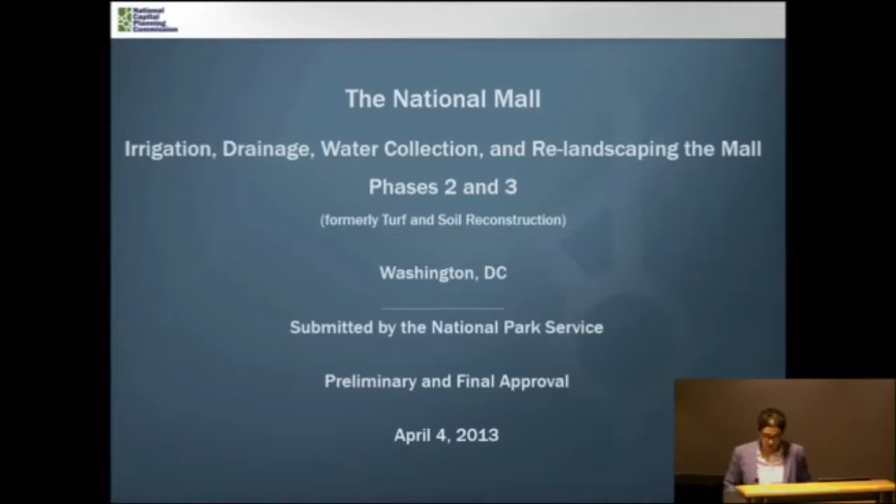This project addresses the center lawn panels located between the U.S. Capitol and the Washington Monument, and is based on recommendations in the National Mall Plan, which was adopted by the Park Service and this Commission in 2010.

The mall plan included a comprehensive vision to rehabilitate the mall in order to sustain high levels of use, accommodate permitted activities, protect park resources, and provide visitor services and amenities. One of the recommendations included improving the condition of the turf and soil on the mall, but also widening the walkways to accommodate the number of public events and national celebrations that take place every year.

The project was divided into multiple phases. Phase 1 was approved by this commission in February 2011 and addressed the 3 easternmost lawn panels located between 3rd and 7th Street. Construction on this portion was recently completed prior to the inauguration celebration this past January. Phases 2 and 3 address the remaining lawn panels located between 7th and 14th Street.

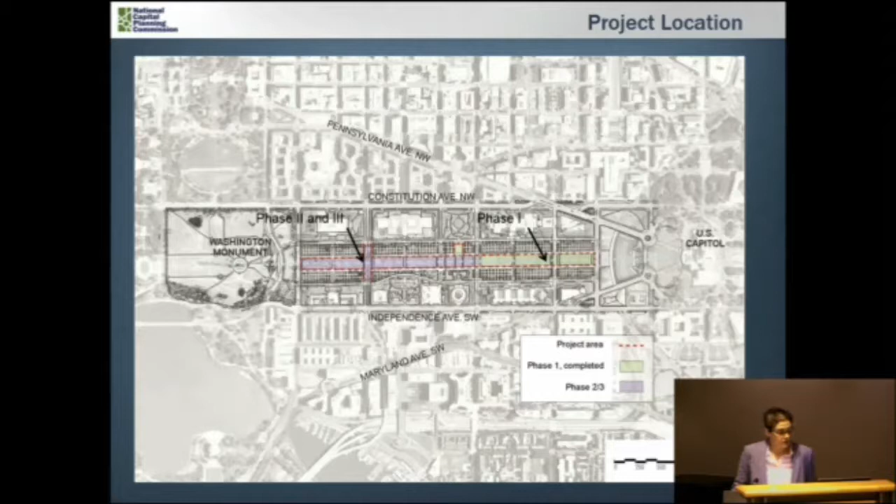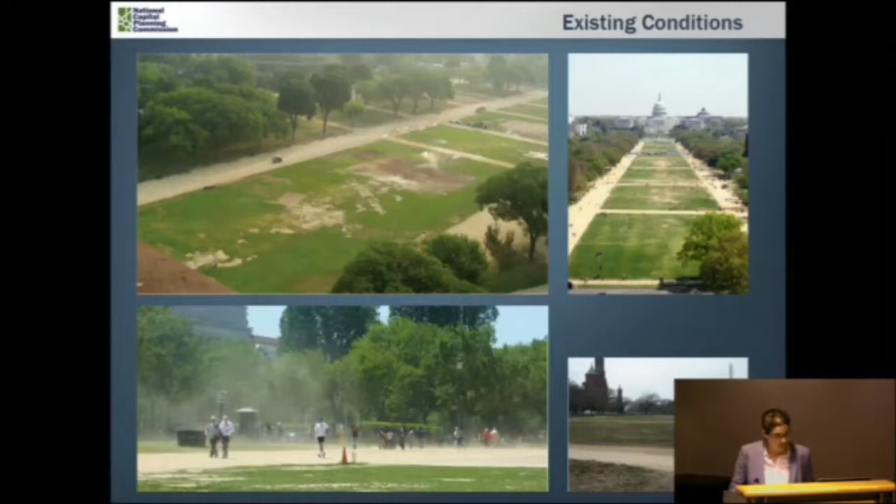Some of these events require tents, equipment, fencing, and different types of stages, and all of this can have a negative impact on the condition of the turf, causing soil compaction and poor drainage over the years. In addition, the turf is worn away in several places, and the dust can cause major disruptions at times.

To address these conditions, as part of Phase 1, the Park Service developed solutions to improve the overall health and condition of the turf. Many of these improvements will be implemented as part of Phases 2 and 3, and I'll briefly review what those are.

A granite curb will be installed around the lawn panels to provide structural support and containment for the soil. A gutter system will be integrated into the curb so that water will be directed into an underground water management system. The panels at the corners will be modified with a 15-foot radius.

The top 18 inches or so of the soil will be removed and re-engineered with a more compaction-resistant variety. The panels will also be regraded with a slight crown at the center to facilitate drainage. Finally, 2 additional cisterns will be installed below grade, along with a drip irrigation system.

2 cisterns were already installed as part of Phase 1, and so with Phases 2 and 3, the total water storage capacity will be 1 million gallons.

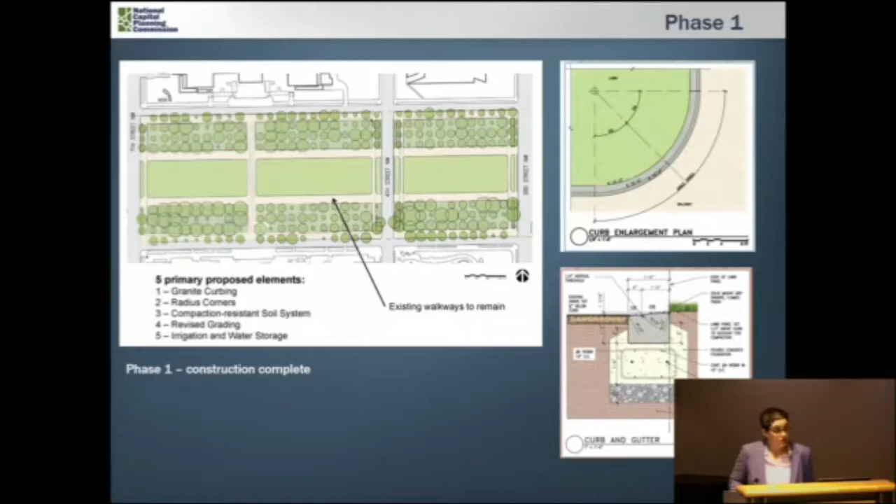These images show the end result of Phase 1. You can see the dramatic improvement in the condition of the turf when compared to panels that have not yet been done, just to the east of 3rd Street.

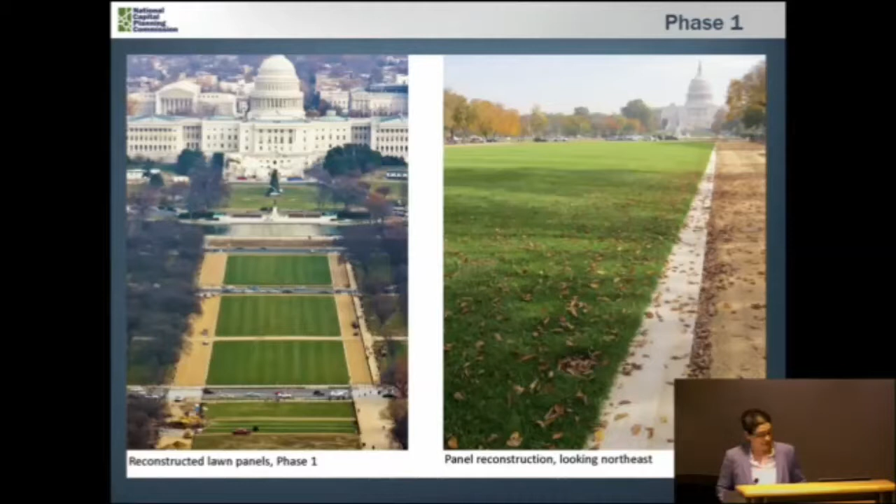Along with the physical improvements, NPS has also issued an operations and maintenance manual that provides new processes and permit requirements for events in order to protect the turf. This manual specifies how long the turf can be covered, as well as a schedule for turf preparation and recovery time between different events. The Secretary of Interior has also signed an order to enforce the mall turf manual, further the goals of the mall plan, and guide NPS as it continues to rehabilitate the mall.

In combination, the secretarial order with the mall turf manual are tools that NPS will use to improve the management of events on the mall. They both provide for special events and activities to continue, but they will also protect the landscape as a historic and natural resource.

The recent inauguration was a test for the Phase 1 improvements, both the physical improvements as well as the operational and management changes that the Park Service is proposing. As required by the new manual prior to inauguration, as you see here, protective coverings were placed over all of the lawn panels.

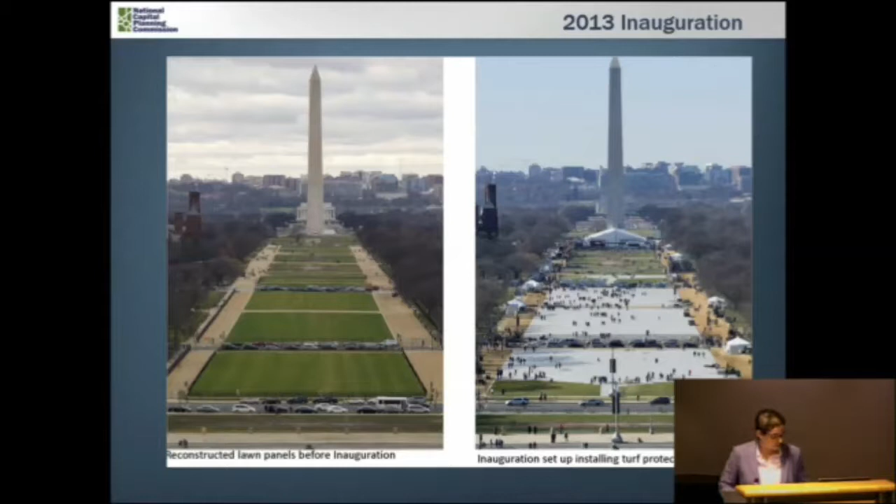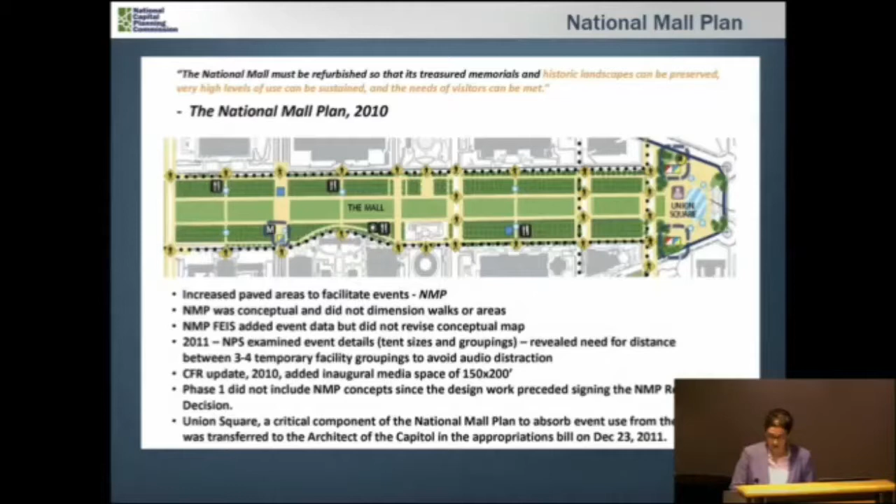As I mentioned, while Phase 1 was under construction, the National Mall Plan was adopted, and therefore the remaining phases of the project, Phases 2 and 3, will introduce recommendations from that plan regarding increasing the paved area on the mall to accommodate public events.

In March of 2012, this commission provided comments on the 3 schemes that NPS was proposing for widening the walkways. In some locations, NPS was proposing at that time to widen the walkways to as much as 146 feet. While the Commission supported the Park Service's efforts to rehabilitate the mall and accommodate large events, the Commission asked for additional information in order to evaluate the extent to which the walkways needed to be widened.

Since receiving the Commission's comments, NPS has held several interagency meetings with NCPC staff, the Commission of Fine Arts, as well as the District of Columbia State Historic Preservation Office. The results of these meetings basically indicated that the general consensus was to minimize widening the walkways in order to maximize the continuous green of the mall, which is an important character-defining feature, and to preserve views towards the Capitol and the Washington Monument.

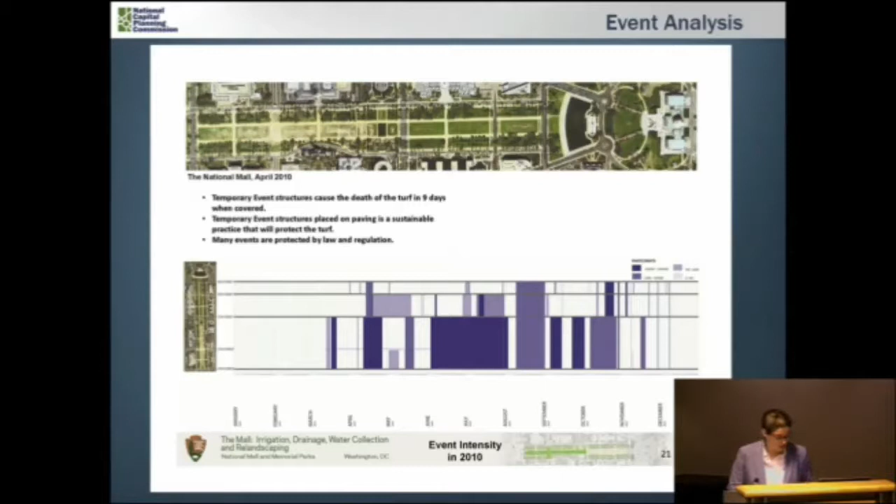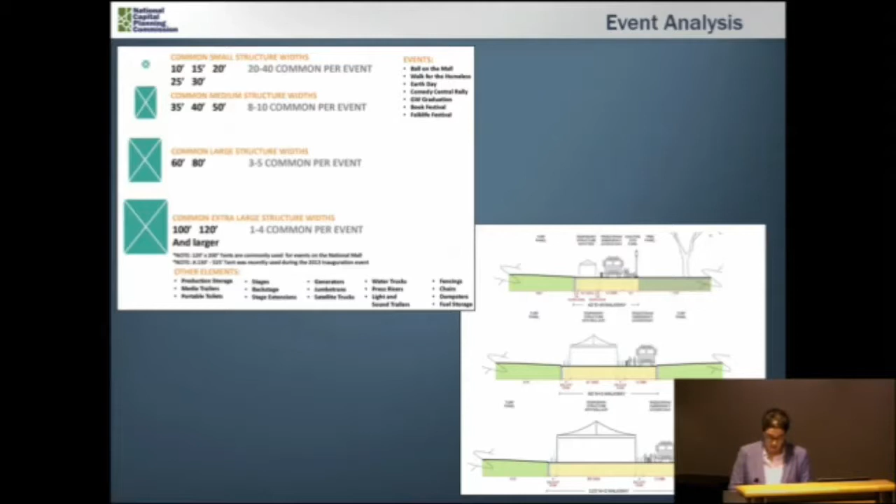In determining the appropriate width for the walkways, NPS looked to historical plans, as well as the data on the typical size of tents and equipment that are usually placed on the mall to arrive at their proposed scheme. In order to accommodate some of the largest events and the tents, and also accommodate circulation for pedestrians and emergency vehicles, NPS determined that 105 feet was the minimum size required, as you can see in the sections on the lower right.

The proposed design basically calls to widen the walkways along the 9th and 12th Street corridors to 105 feet, in this location and this location here. The other walkways will be taken from 40 feet to 60 feet.

Two non-turf areas will also be created to the north and south of the center lawn panels, just directly adjacent to the metro station in this area, and then directly to the north of the center lawn panels in this location. This will be 146 feet. And then the smaller lawn panels that are located to the west of 7th Street will be combined into one larger lawn panel.

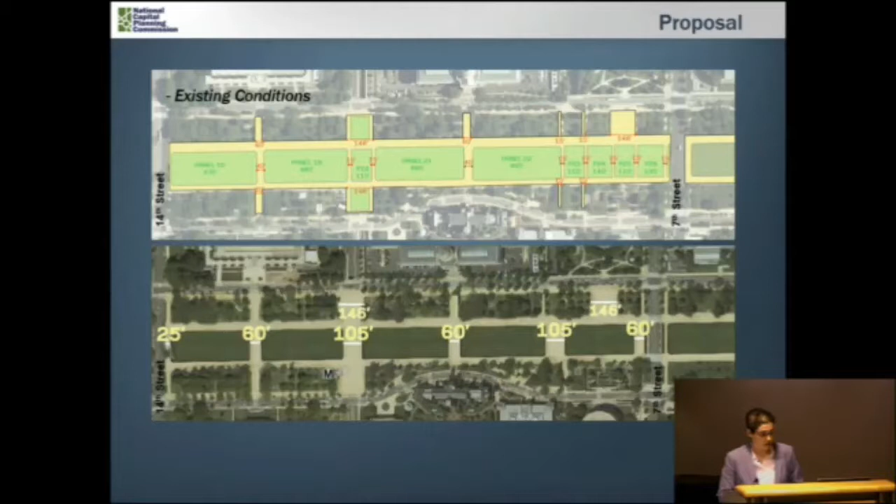As in the Olmsted Junior Plan in the 1930s, this design establishes lawn panels of approximately equal size and a regular pattern of 60-foot wide walkways, with 2 wider areas to accommodate larger tents and structures. It does require some changes to the management of events, but the majority of events will be accommodated without impacting the turf.

CFA has recently approved the plans for this project, and noted in its comments how the proposal balances protection of the historic landscape with accommodation of public events.

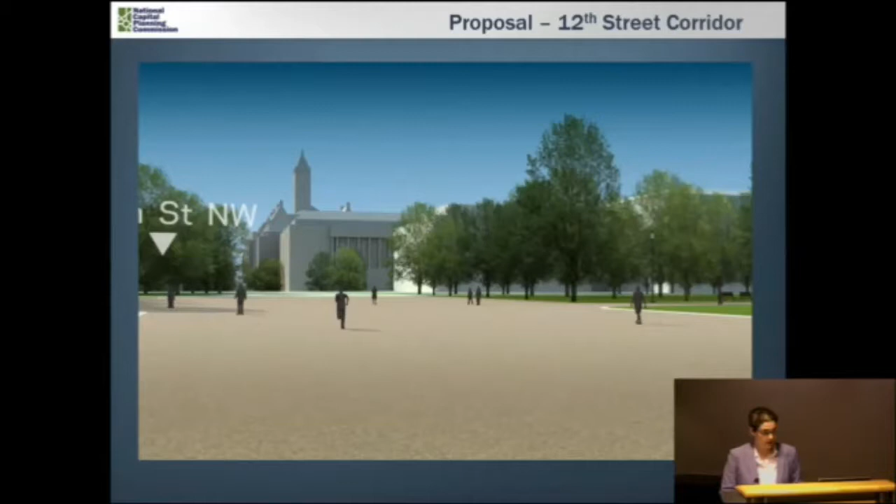Here you can see some renderings. This is the proposal along the 12th Street corridor where the walkway will be widened to 105 feet. And here, just past the 9th Street corridor, it will also be widened to 105 feet. This gives a good idea of how the views and the continuous green along the mall will be maintained, and how the regrading of the panels accentuates the green along the mall.

With that, it's the Executive Director's recommendation to approve the preliminary and final site development plans for phases 2 and 3 of the turf and soil reconstruction on the mall, noting that the project takes into account recommendations from the National Mall Plan to widen the non-turf areas in order to improve accommodations for large public events and national celebrations. That concludes my presentation.

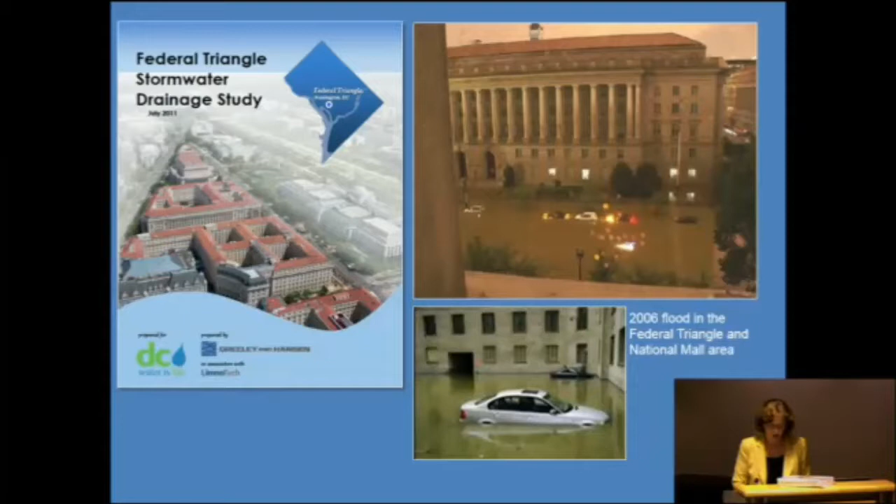This effort is being led by Albert H. Small, a local developer and philanthropist, planner and architect Arthur Cotton Moore, and the National Coalition to Save Our Mall. Since summer 2012, we have been briefing federal and DC officials and agencies, congressional staff, and the public on this concept. We have found much enthusiasm. Last Sunday, the Washington Post published an editorial supporting the idea, a copy of which we've included with our testimony.

The idea is this: construct under the mall a hybrid parking garage that does double duty as a stormwater reservoir. Include in the parking separate spaces for cars and tour buses. Also include a separate bottom-level cistern to collect rainwater and groundwater from nearby buildings. This facility would contribute to creating a sustainable and resilient mall for the future.

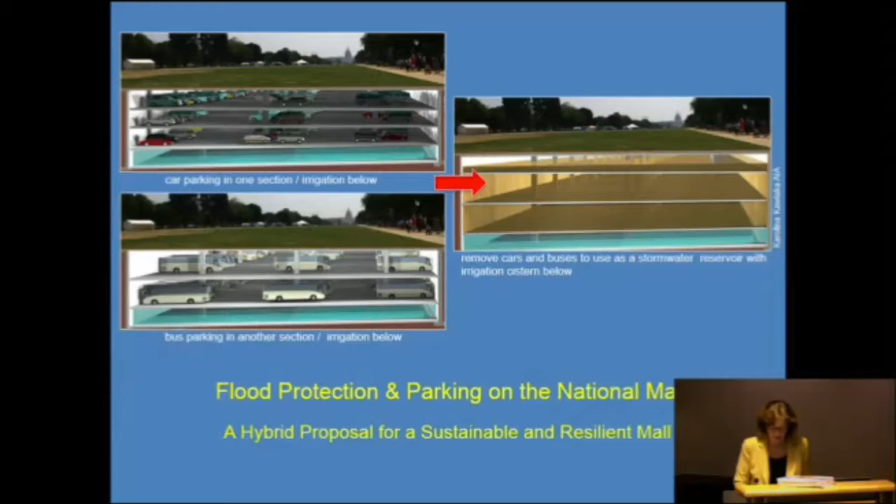The location for the facility, proposed in a study conducted by Dewberry Engineering, is between 9th and 12th Street. Entrances and exits for the parking facility could be placed in the 9th and 12th Street tunnels to minimize intrusions on the sensitive mall landscape.

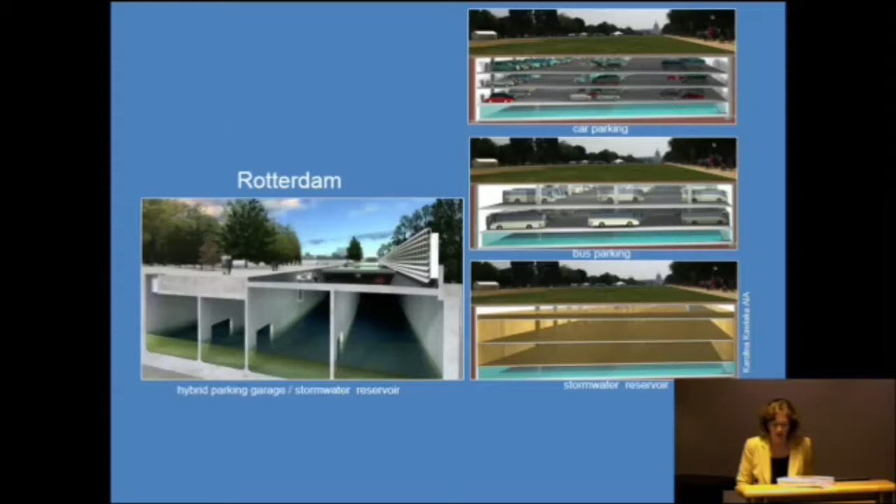Underground garages in cities around the world and the United States provide visitor access while creating car-free city streets. Here in Washington, the National Cathedral Bus and Car Garage is a successful example. One model of a hybrid facility that is both parking garage and flood reservoir is this example in Rotterdam.

Our proposed hybrid facility solves 3 major needs: a reservoir able to store 34 million gallons of stormwater, cisterns to supply a reliable source of water for irrigation of the grass as well as all mall area gardens, trees, fountains, and more. The Park Service cisterns, in contrast, will provide only 30% of the water needed for the grass alone, and no flood protection.

And parking for more than 1,000 tour buses and cars. An additional benefit is completion of the Park Service's turf grass as the green roof of the facility. Revenue from the self-funding parking component will help offset the capital costs of construction.

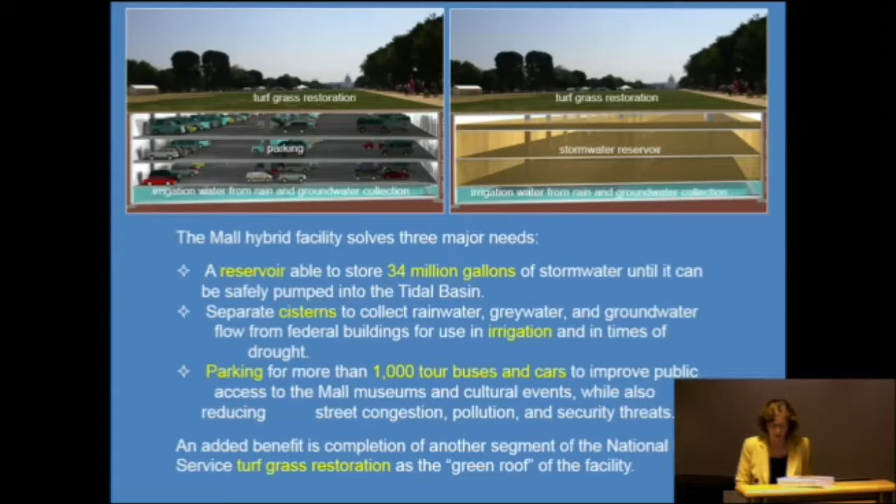We are looking at public-private partnerships as a model to develop, fund, and complete this proposal. Additional benefits could include restrooms, a mall visitor center, showers and restroom facilities for bus drivers, integration with Metro and Capital Bike Share, a security office, and an educational demonstration of this innovative water treatment facility. These features are among the amenities suggested during our meetings with the Smithsonian, the Museum, Destination DC, and others.

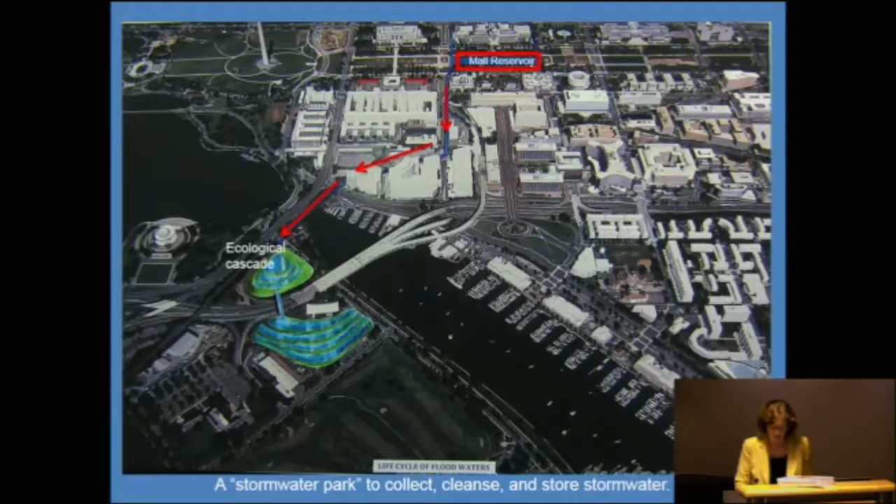You are looking at draft number 30 of our proposal. Each meeting has helped this proposal evolve. Dirt from the mall excavation can be used to create an earthwork stormwater park or ecological cascade on East Potomac Park to collect, cleanse, and store stormwater until it can be released into the Potomac.

Everyone benefits. Visitors will find easier access to the mall's museums and cultural events, much needed as shown in the Fox 5 WTTG television news story last Sunday. Federal and district agencies can get tour buses off neighborhood streets where they cause congestion and pollution.

There will be no more need for ugly piecemeal flood measures, such as these sandbags lining Metro vents outside EPA headquarters. The federal and district agencies will get the much-needed flood protection facility as part of the larger project, developed and funded by a public-private partnership.

Our proposal still has a way to go, including cost-benefit analysis, traffic studies, and engineering studies, but it is not a pipe dream. With this hybrid facility, the mall will be a model of sustainability and resiliency in the heart of the capital and the nation.

This is, in our view, the kind of long-range, comprehensive, visionary proposal we need on the mall to sustain the symbolic landscape's crucial role in our nation's civic life in the 21st century. We believe as well that private sector initiatives such as this will become an important tool for planning and infrastructure upgrades for Washington and the mall in the future.

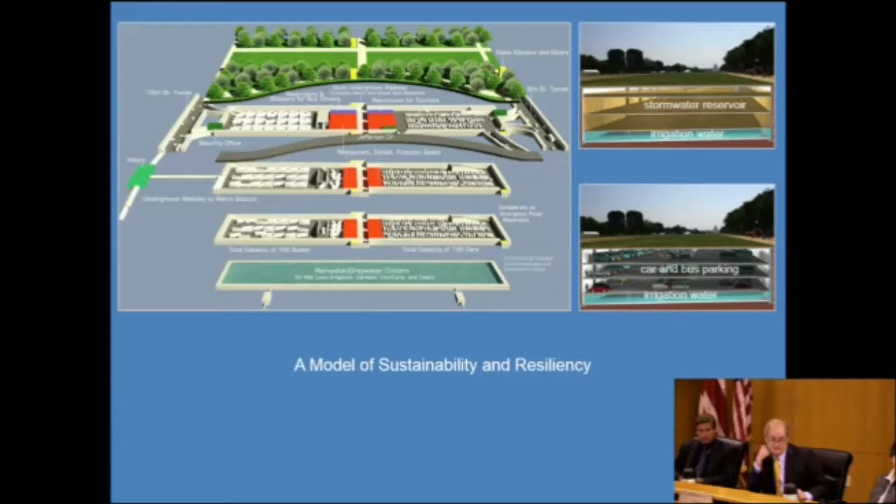Any questions? Mr. Goni? Dr. Feldman, you mentioned that a public-private partnership and the potential for parking revenue to finance this project. Are you saying that's possible in whole or in part?

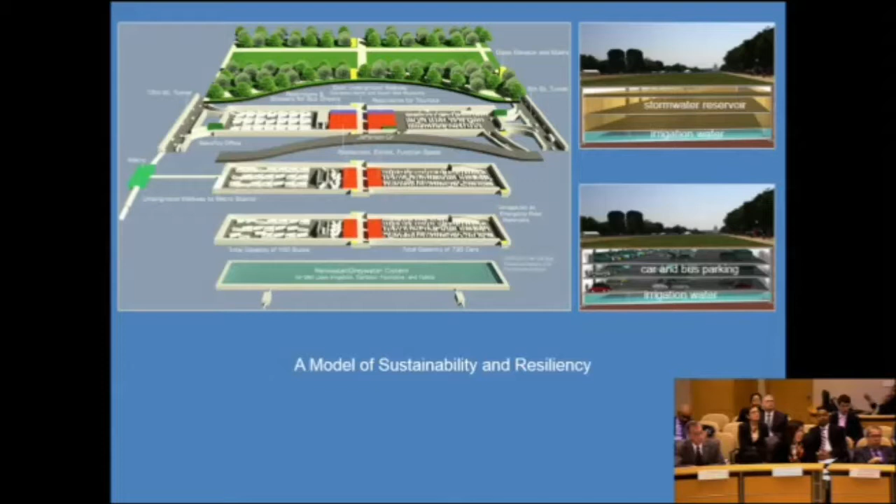It's probably in part the parking revenue. We're actually in the process of talking with a variety of agencies and organizations about the public-private partnership idea. Mr. Small was working with Patton Boggs, who also had some experts looking at it, but really the questions are, we don't know the answer to that. It's been suggested, though, that the parking, and in particular the bus parking, could provide a considerable amount of income.

Also, restaurants or other revenue-producing elements could add to that. But frankly, we don't know. We don't know the cost, because the cost of the parking, simply a car parking garage, which Dewberry did for Mr. Small back in 2011, a two-story, 1,000 car garage was $60 million.

The cost estimate of this flood reservoir with new sewer lines on Constitution Avenue was 400 and some million. So I think we're somewhere probably in between that, but we don't know yet. But we actually had a meeting this morning, and we're having another one tomorrow to try to get, again, privately funded data to evaluate these questions, because we really don't know that it's feasible yet until we do that.

I have a question. Is the 400 million exclusive of the water treatment facility in East Potomac Park? The 400 million, and I'm not sure I read this correctly, if anyone has a better understanding of the data in this, but the 400 plus million comes from this study, which evaluated the stormwater problem, proposed simply a large reservoir under the mall.

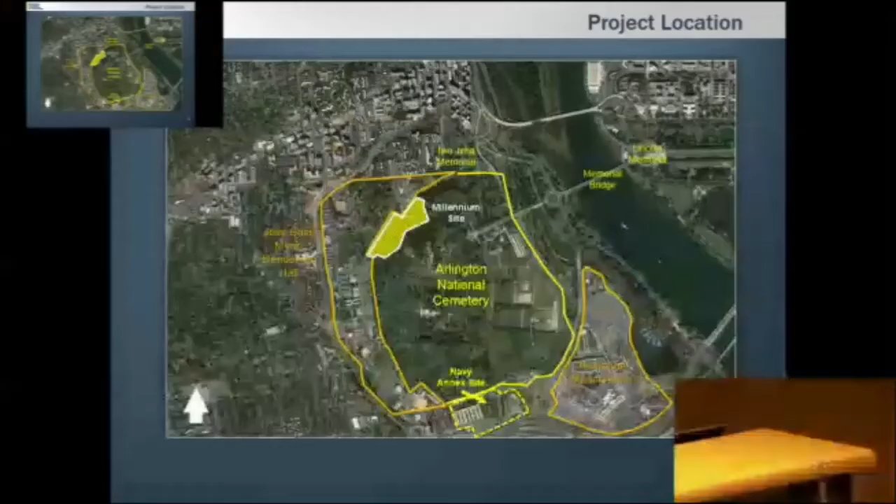In the mid to late 90s, Congress became concerned that Arlington National Cemetery would cease being an active cemetery, and passed laws to extend its life through expansion onto nearby lands - these two sites. The site before you today is just the Millennium site. The Army states that without this project, the cemetery is expected to reach capacity in 2023. The Army also states in the EA that is out for public comment that this project is expected to extend the cemetery's life by 7 to 12 years.

This parcel is made up of land transferred from both the National Park Service as well as Joint Base Myer-Henderson Hall. The yellow part of the parcel shown here was transferred from Fort Myer in 2004. For your orientation, north is to the top of the image, and the outline in white is the actual Millennium Project.

The green striped area shown here is a parcel that was transferred from the National Park Service in 2002, and it is part of the historic setting of the Arlington House, shown here. Finally, there's a purple section, which is the existing maintenance yard for the cemetery, for ANC contractors. Arlington House is listed on the National Register of Historic Places.

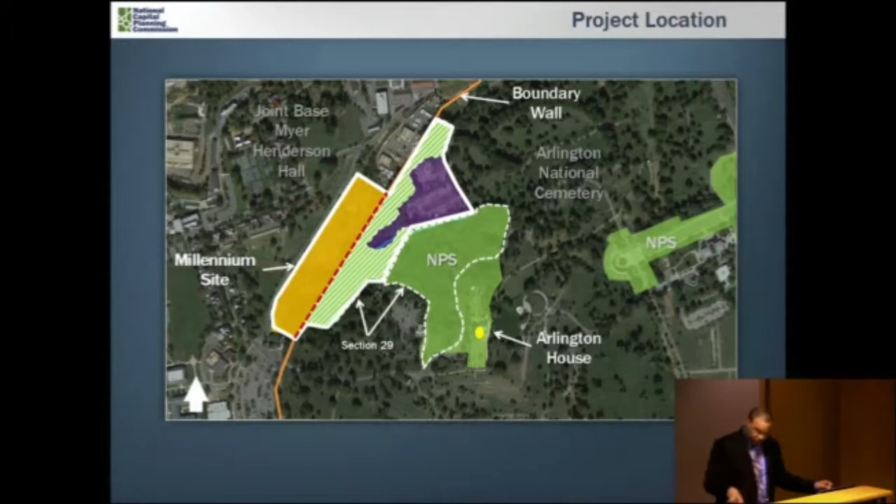I'd like to note that the Arlington House historic setting includes woods found in both the green and green striped area, which I noted earlier, and the woods closest to Arlington House are the oldest, which date back 235 years. There are other wooded areas, and those ages I'll describe in more detail in upcoming slides.

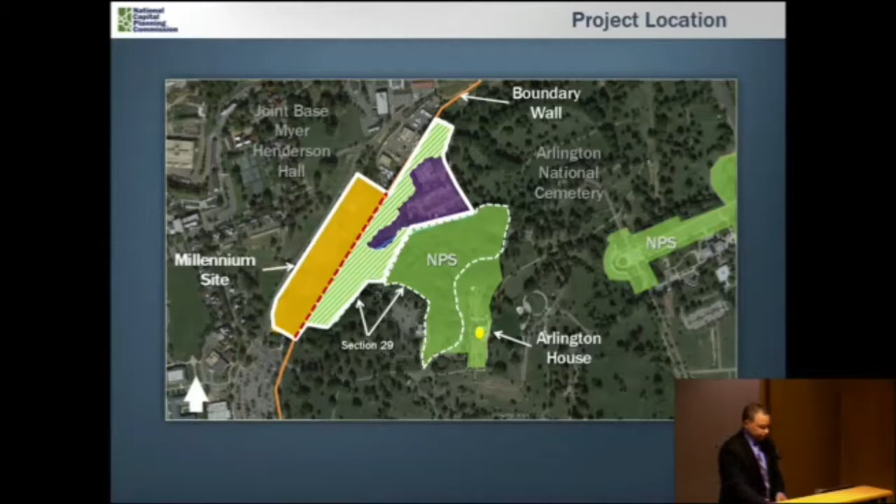So here's the site itself. The land from Joint Base Myer-Henderson Hall is generally an open area with some trees as well as grassy areas, while the land from the National Park Service is generally wooded. There are moderate to severe slopes on either side of the perennial stream which runs through the site. The existing stream bank has been eroded from previous storm events, and a restoration will be included as part of this project. You see the stream shown here in blue.

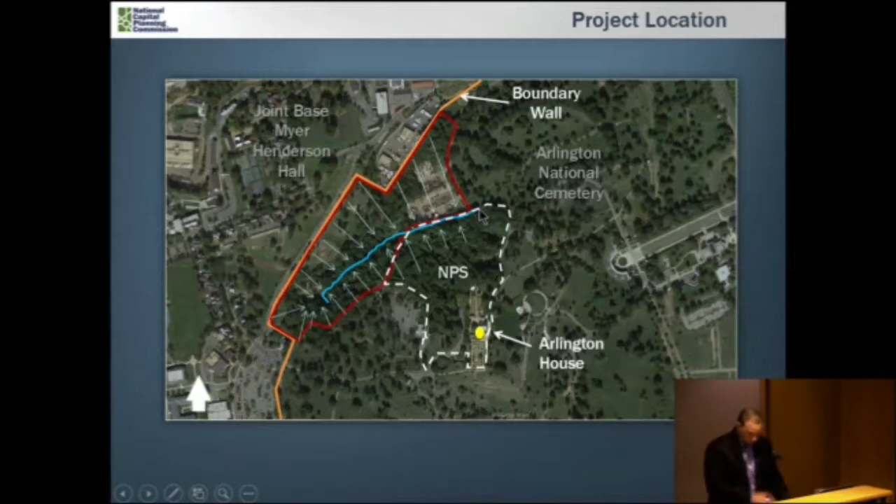So all of that is the Millennium site. You'll note a historic boundary wall, this kind of dark line that goes through the site. That used to be the dividing line between Joint Base Myer-Henderson Hall and the cemetery. A 1,300-foot portion of this wall will need to be removed as part of this project. The Army states it will reuse pieces of the wall in the construction of the perimeter wall when it's built, and I'll describe that in more detail in an upcoming slide.

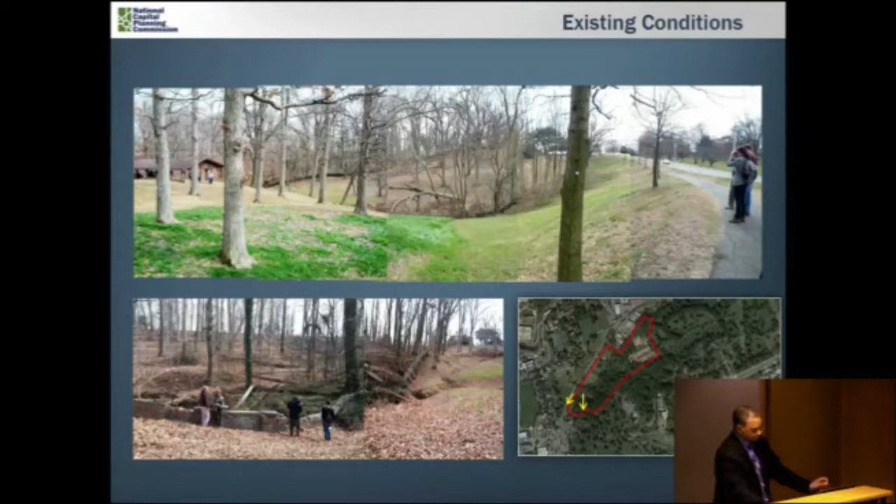Another set of condition images. The top one is from the Arlington National Cemetery maintenance area. You note on the map on the bottom right, it's looking towards the west. The other images are of the Arlington Woods. In the bottom left is the stream, the part that's been eroded. This gentleman is standing in the middle of the stream, so that's quite a bit of erosion that's taken place.

Next we'll get to the proposed site plan. The Army developed 6 alternatives as part of this project over the last few years, and has chosen this alternative, E1, as its preferred alternative. I'll describe each of the elements of the design in upcoming slides.

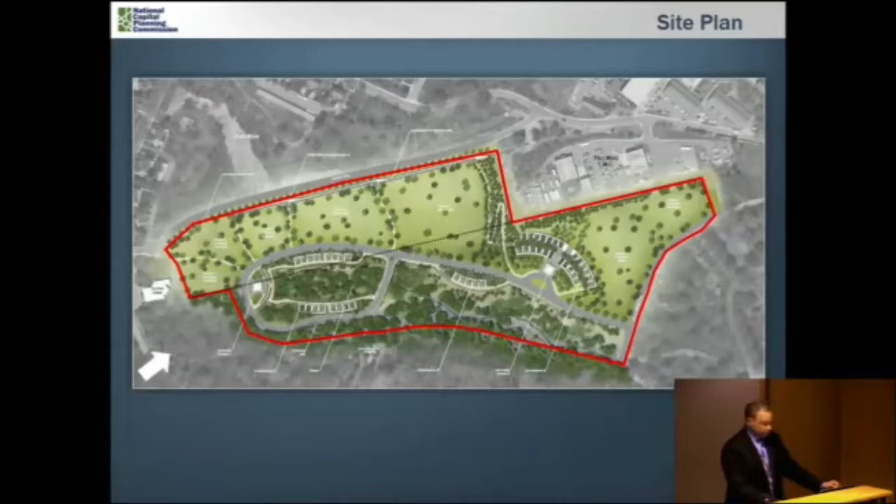The plan includes 29,922 burial sites for both interment and inurnment burials. For in-ground burials, they're shown here in the yellow-orange color. There are 3 different types: a traditional burial, a pre-placed crypt, and an area for cremated remains.

The traditional area is here. These are burials very similar to what is occurring now in the rest of Arlington National Cemetery. These pre-placed crypts are concrete structures placed side by side, and they're actually in the ground, covered with between 18 and 24 inches of soil. These allow caskets to be placed closer together, therefore increasing the number of burial spaces available.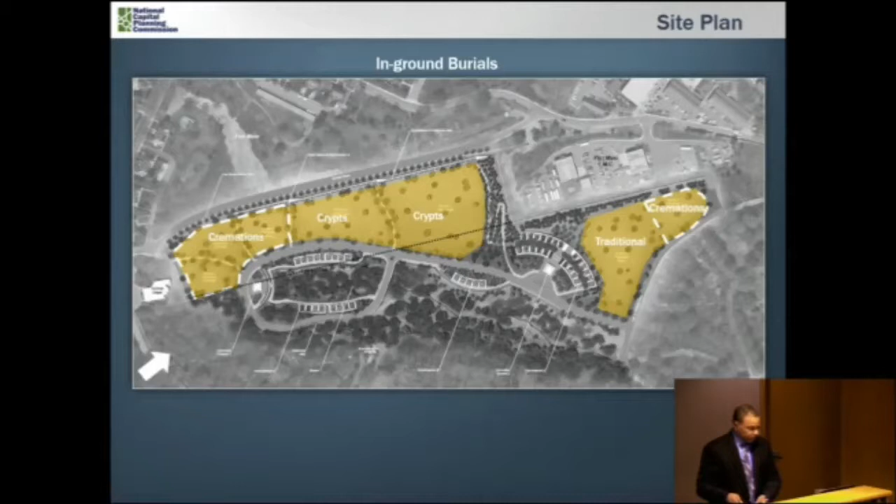The final area is for cremated remains, one area over here for in-ground burials, and another area over here, so on either end of the Millennium site. This allows the Army to give families the choice of either having in-ground burials for cremated remains or using the niches. I'll talk about the niches in the upcoming slide.

The columbaria, you see an image of an existing columbaria, one of the courts that actually currently exists on Arlington National Cemetery.

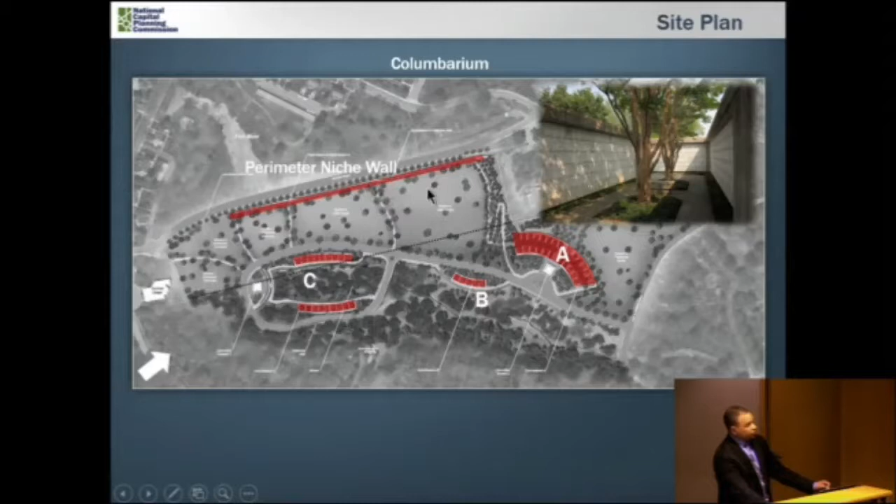They provide niches or small spaces for cremated remains, shown in this image in red. There are three court areas: Columbaria A, B, and C, going from east to west, or left to right. A and B are shown here, and C is these two areas. Then there's a perimeter niche wall shown along the border with Joint Base Meier-Henderson Hall.

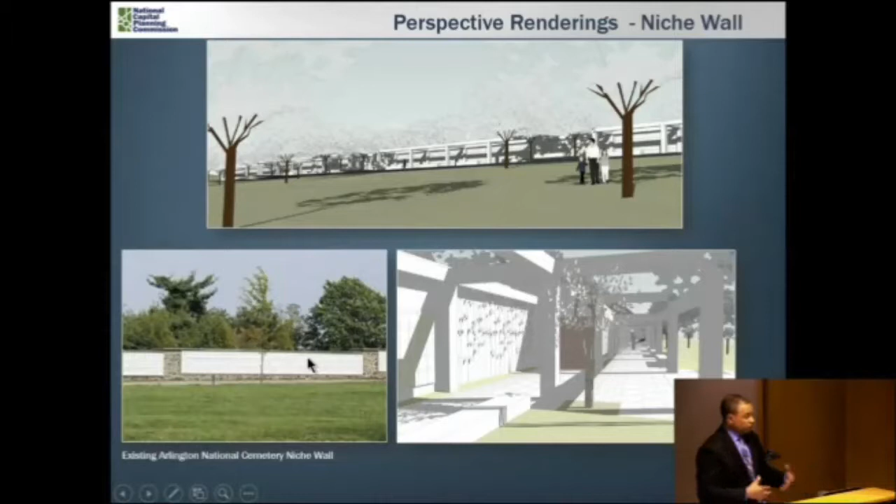This image just shows that there is an existing niche wall at Arlington National Cemetery. Interestingly, on the other side of this is Route 110—it's a niche wall on this side, but on the other side it looks just like a regular brick or stone wall.

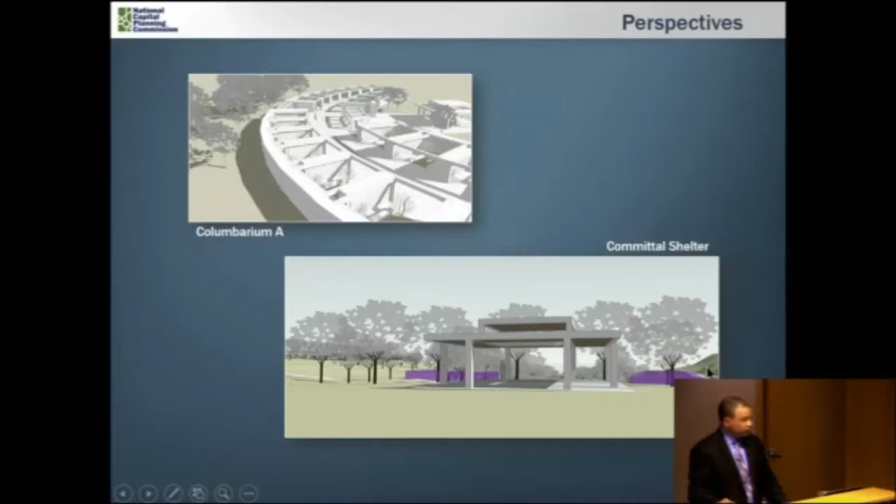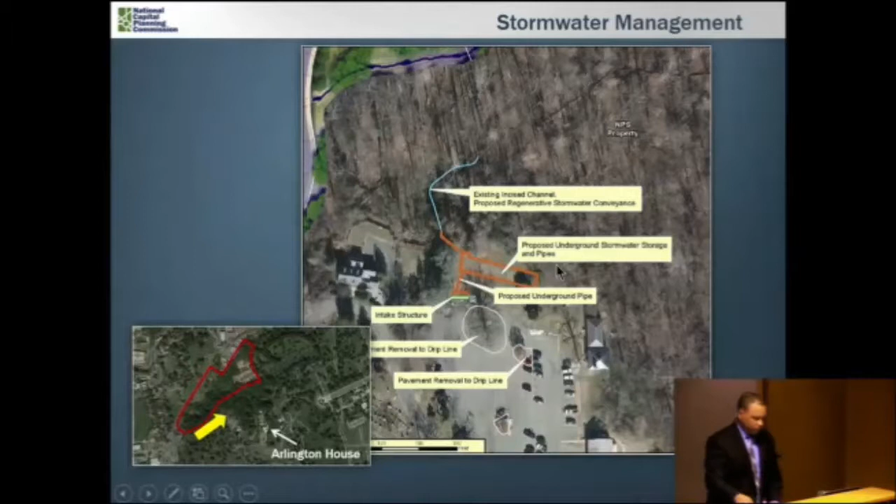Staff reviewed the proposal and identified the following issues. The comprehensive plan has a tree replacement policy which indicates that where tree removal is necessary, there should be no net tree loss, so the Army should strive to meet this policy. The Army states it is removing 882 trees, and as mitigation is planting 600 native trees and 500 native shrubs as part of the project.

Historic preservation is also a concern. The National Register nomination for Arlington House includes a portion of what's now the Millennium site - the part that was transferred from the National Park Service to the Army. The Army has been aware of this and has been studying the various impacts on the project. It began identifying impacts to the various tree stands that make up the site, and also exploring the visual impacts. It's also seeking ways to minimize these impacts by making changes to the design and proposing mitigation.

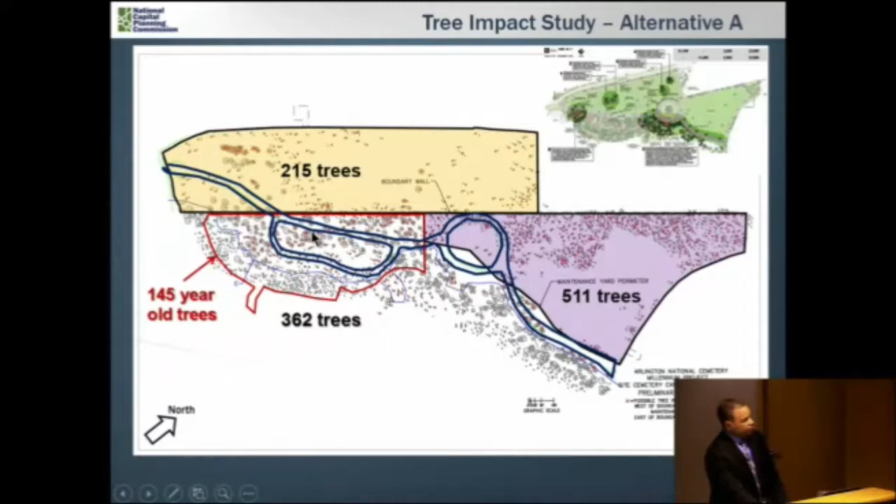Alternative A, which is one of the alternatives they were exploring, shows that they are actually preserving more trees as part of this, some more trees in the 145-year-old tree stand area.

In this preferred alternative, after study they are trying not to remove some of the more sensitive or older trees in that 145-year-old tree area. They have further reduced the impact and are now looking at just 167 trees in that red area that they will be removing.

For the visual impact study, the Army is... Quick question before you go on. On the tree mitigation, forestry mitigation, you said they're going to be replacing 600? Yes. Where, and of what size and type?

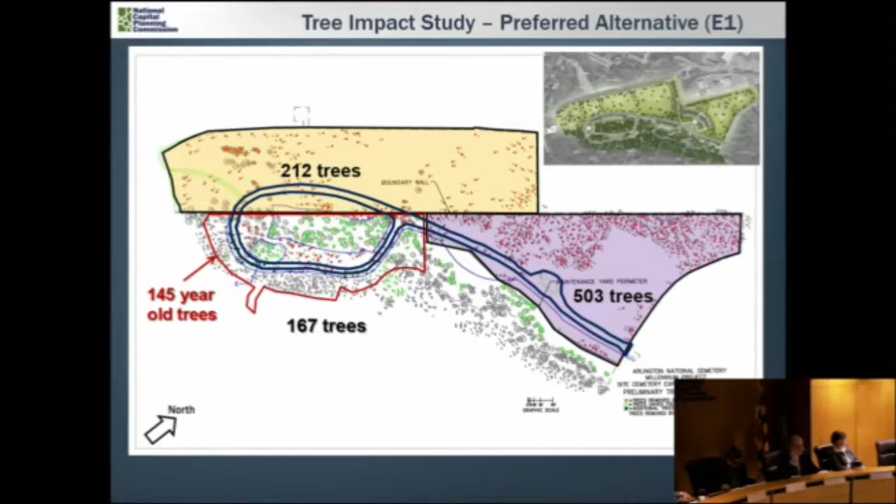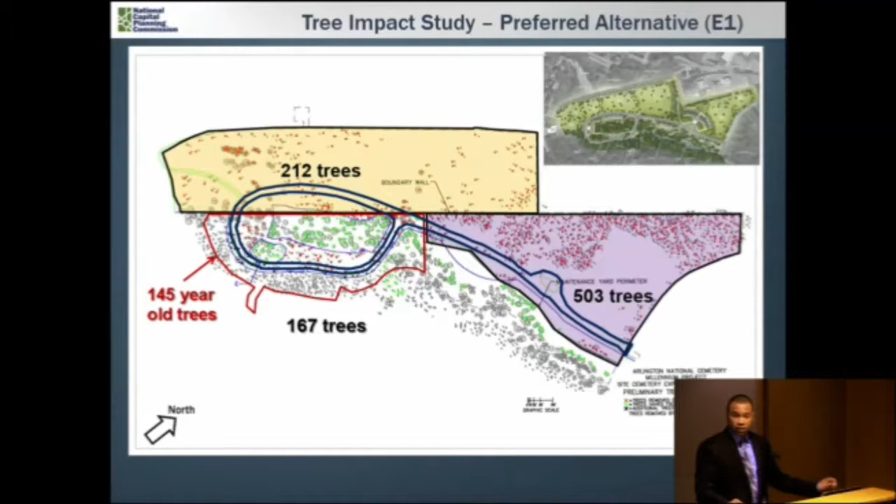I don't see that specified, but they're replacing trees throughout this entire area. There's some being added here, and some along the stream, because currently there aren't many trees on one side and only a little on the other, so they wanted to increase that buffer. Most of these are fairly small. I'll leave it to the Army to answer the caliper of tree they're looking at replacing, but the 145-year-old tree area refers to the age of the oldest trees there. So there is a variety of trees—some are fairly young at 6-inch caliper, and some are much larger.

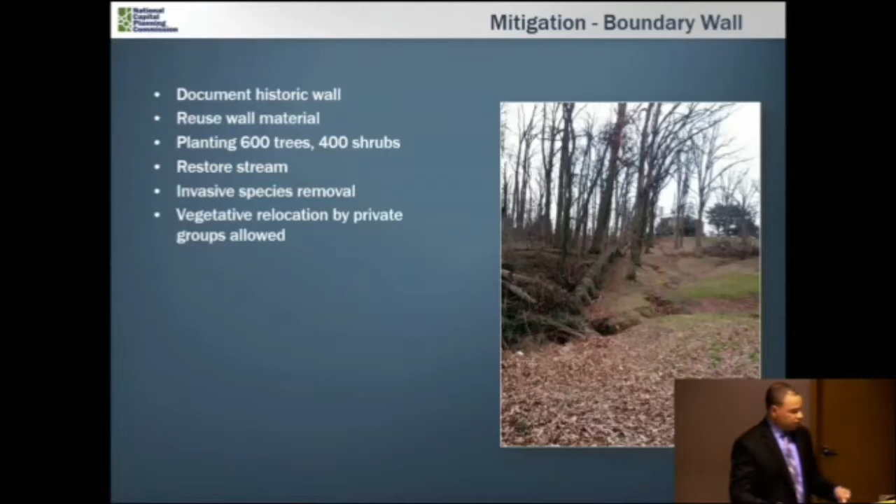Staff has received comments from local citizens groups about this project. The main concern deals with the impact on the 145-year-old tree woods here. The Army is looking at maintaining quite a few of the trees, particularly around where they're restoring the stream, which runs generally in this area down to Ord and Weitzel Drive. That's what they're looking at doing now.

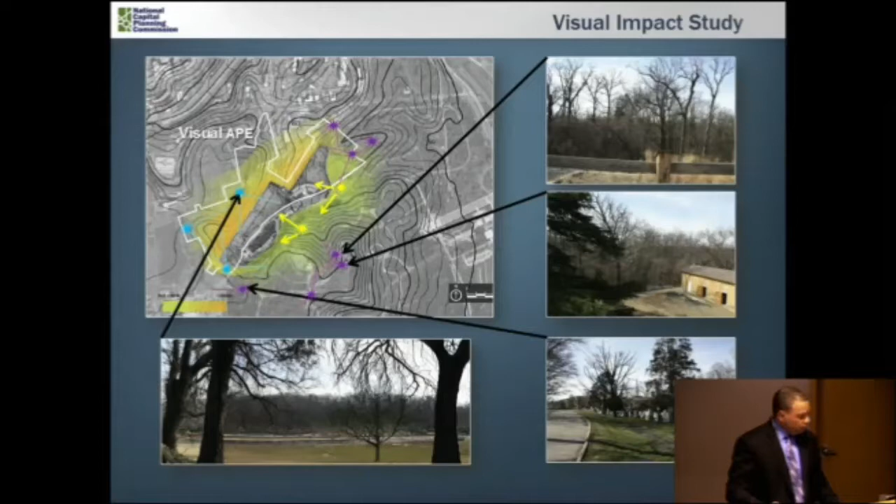With all of that, the Executive Director's recommendations to the Commission note that Arlington National Cemetery is projected to reach full capacity in 2023. In recognition of this, Congress directed the Secretary of the Interior to transfer a portion of the Arlington House Woods, then under NPS jurisdiction, to the Secretary of the Army for cemetery expansion. Arlington House Woods are part of the historic setting for the Robert E. Lee Mansion and Memorial, which is on the National Register of Historic Places. Section 106 of the National Historic Preservation Act directs federal agencies to take into account the effect of an undertaking on resources listed or eligible for listing in the National Register. The federal environment element of the comp plan states that when tree removal is necessary, trees should be replaced to prevent net tree loss.

And the creation of new burial sites in this area cannot be accomplished without substantial tree loss, including adverse effects to the Arlington House Woods. The Commission also notes that the current proposal reflects the result of ongoing efforts to reduce adverse effects to the Arlington House Woods, and includes mitigation measures such as stream restoration within the woods.

The Commission therefore comments favorably on the concept design and directs the Department of the Army, in subsequent submissions, to continue refining the design to minimize harm and provide appropriate mitigation through consultation as required by the National Historic Preservation Act; to continue refining the visual impact survey in ways responsive to consulting parties, including the National Trust for Historic Preservation and members of the community; to explore decreasing the width of the roadbed in the area of the Arlington House Woods as a further way of reducing tree loss; and finally, to prevent a net tree loss by exploring the possibility of planting trees at Joint Base Myer-Henderson Hall or on National Park Service property.

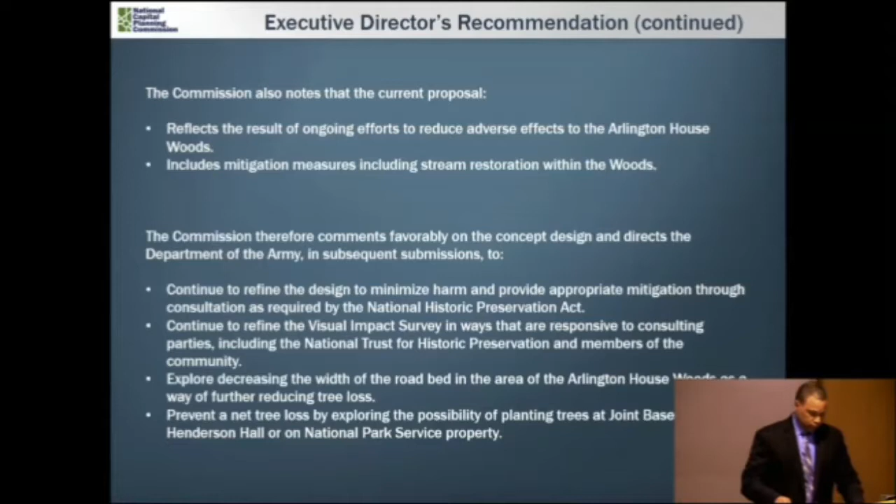And with that, I'll conclude my presentation. Thank you. We have a number of folks who have signed up to speak, so if we could just go straight to the public comment section.

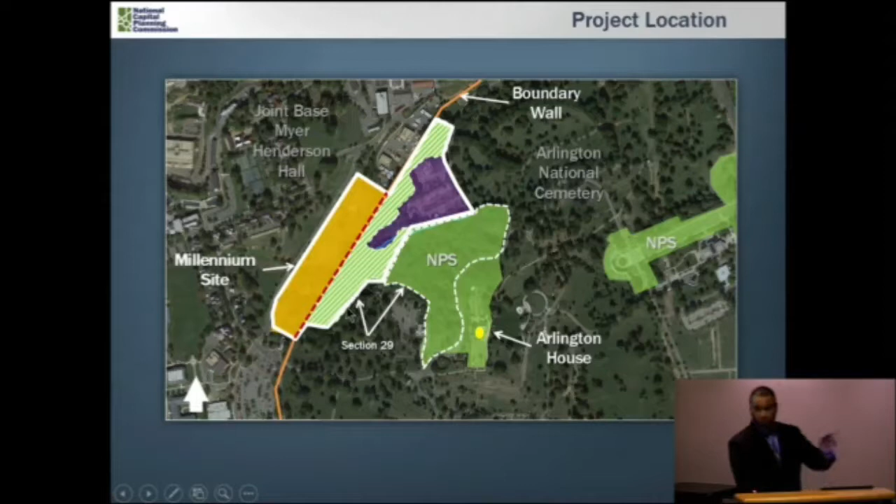This is the section of the site. This is taken through, and remember, Section 29 is the portion that's shown here in the kind of striped area. So this portion that's yellow was part of Joint Base Myer-Henderson Hall, and is not included in that Section 29. So if you look at it, the section that I was showing you a little earlier just cuts a section through about this portion of it. So about half of that site would be included in that section that was drawn, and I'll get back to that.

So this section, again, this is the stream. Get a little closer. This red line is actually showing, and this is from the Army, where the contour, where the original grade is. There is one portion, and I'll show that in a little bit more detail, where this portion of the street is not meeting the contour, and there's a little portion that's also not meeting it.

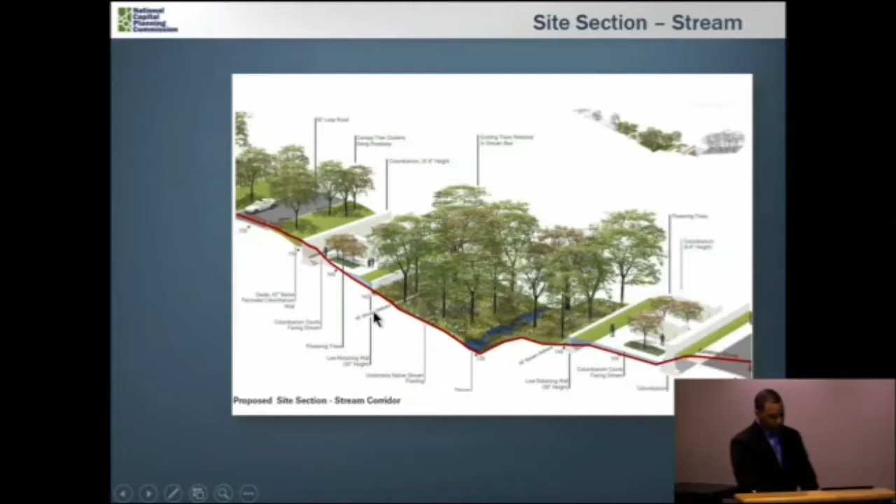And give me a sec. Oh, here.

So this is the existing grade, and this is the change in grade for where the roadway is, and where the columbaria is. Generally speaking, the contour is here, and that's the portion the previous speaker was just talking about.

When you're putting in the columbaria, they knew they have to be put on a flat area, so there would have to be some flat areas and retaining walls as part of the design. At the time they created the public law, they did not have any design they were looking at. It's fairly clear there was an intention when the land was transferred that it was to be used for either in-ground burials or for columbaria.

And it seems as though this, minus this little piece, is generally following the contours that you have. Again, there is a disagreement on that, as you heard. I think if you look at it, it can kind of go either way.

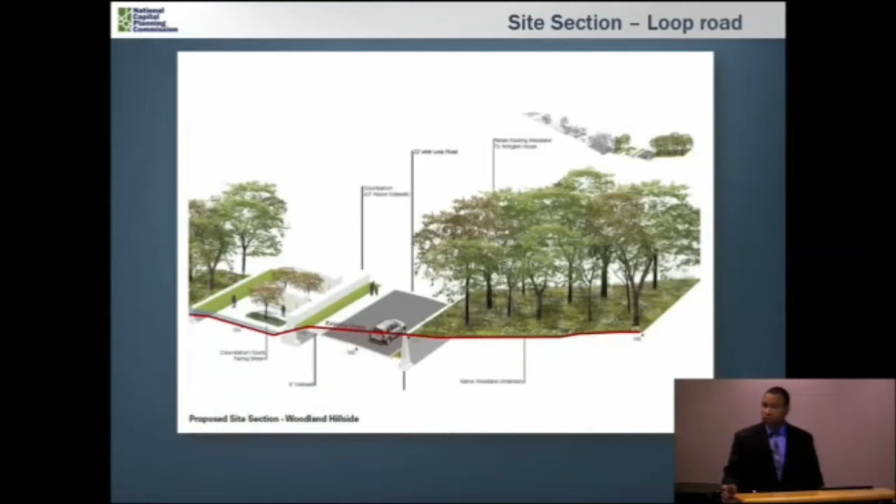Can you go back to slide 11 for a second? Sure. All the way to the left there, that same dotted line. Actually, I can show you a little more detail of that. You see that? No, that's not what I'm talking about. I mean, I do want to talk about this. I know, but it's this line that's here. That line there. Yeah, okay.

But again, that's not Section 29. So, got it, I just want to be clear on that. Section 29 is about here in this diagram, because remember, it's about where this columbaria is. So this portion of it is Fort Myer, or was former Fort Myer.

Okay, so if the roadway is outside of Section 29? In this instance, I think there's a part of it about right here that may be in it, but at that point I don't have a section of it, so it's hard for me to tell you where that is for that, at that location.

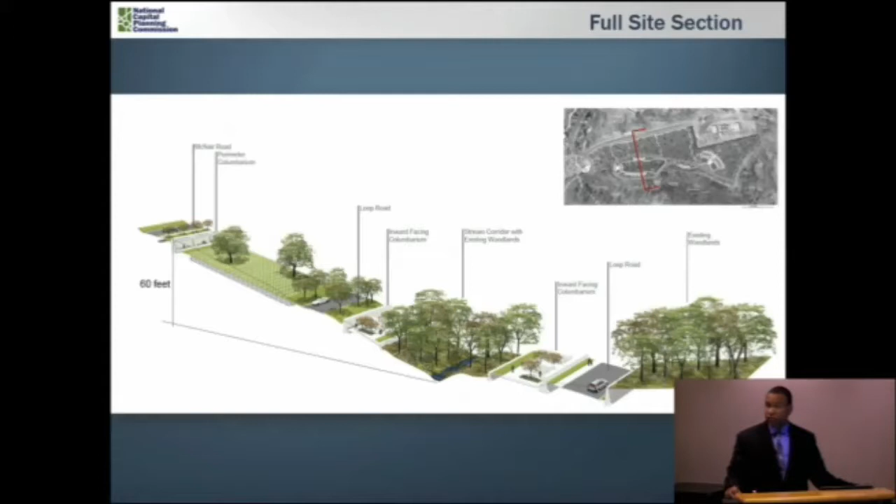Can you show the plan again that shows us where the loop road is? Okay, and why is it necessary for there to actually be a loop road, as opposed to a road that services the necessary areas rather than cutting through the slope like that?

Is it part of the explanation that the horses don't go in reverse very well? Yeah, I mean, could be a trade-off. They have looked at an instance where there's a smaller kind of circle, and I can show you the design if you'd like. The other thing is, why is that loop road in Section 29 as opposed to the other part of the campus?

If I could, on why the loop road is there, it's not only the caissons, but when we have a service, we can have up to 400 people attending one service as well. So it's for flow as well as for the caissons. And the reason it's in that location is because the design took into account the topography of what we inherited.

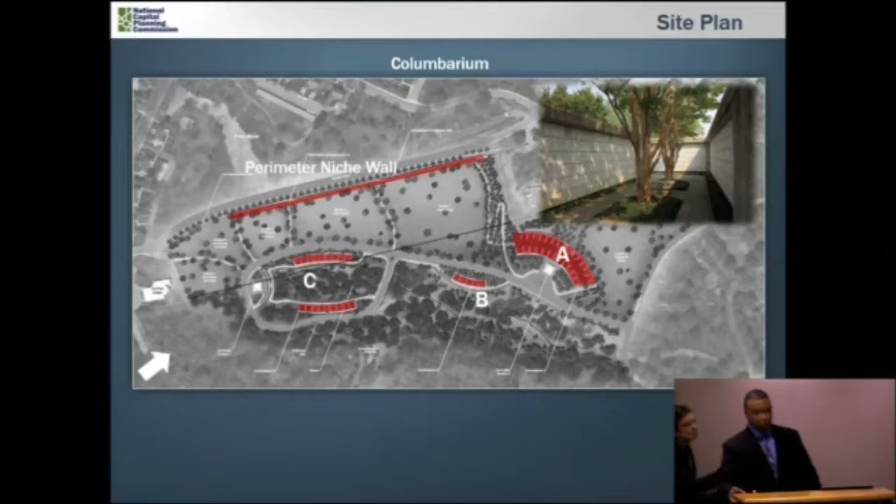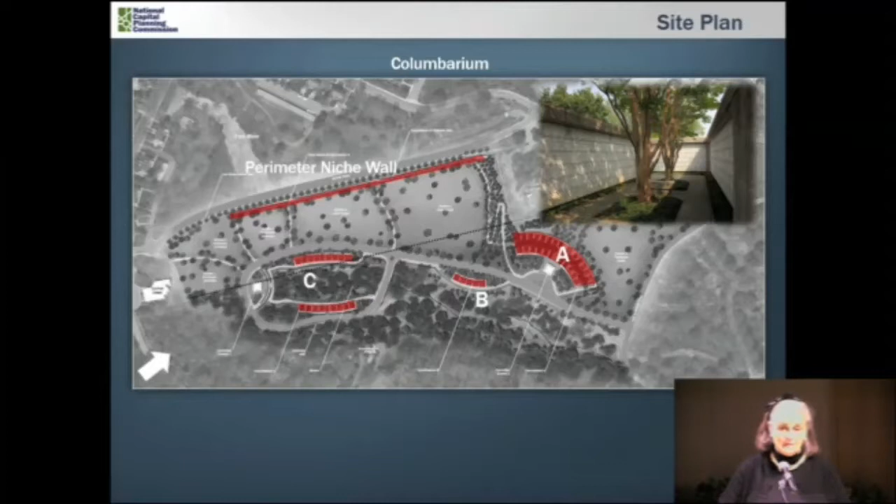So you want to explain that again? I'm sorry, I didn't understand that. The design, and why we have the loop road there, is the entire design—and I actually have my project manager here who can probably explain it even better than I am—is the reason it's there, is where we have our in-ground burial and where we have our columbarium. There is a reason why the road is placed where the road is placed. Greg, is there anything you want to add there? No, ma'am.

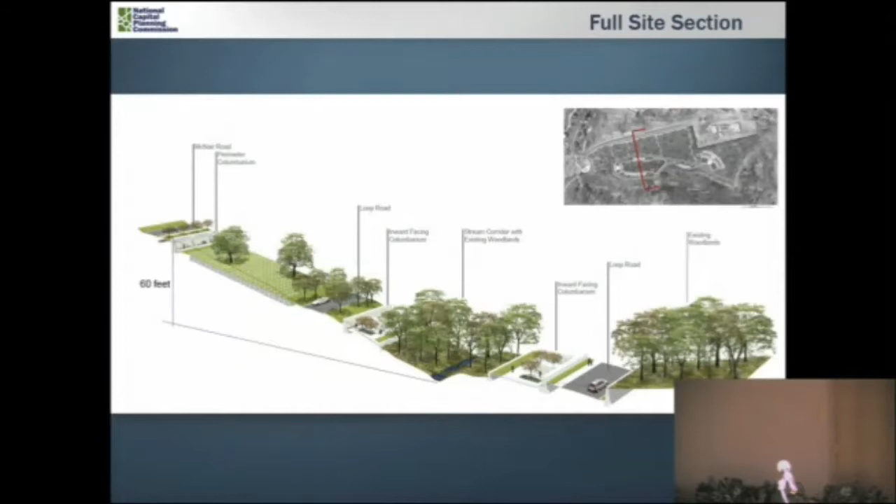Okay, there is a reason, but could somebody explain the reason a little bit? Because I'm just curious as to why it's not looping through the other section as opposed to through Section 29.

This is probably the best way to show it. This is the image showing where that loop road is going to go. This land slopes down. There's actually a drainage area included in that portion of the property. Because of where it drains down and up, the topographic changes that happen here make it really hard to do that and then have the space to transition up to this road, which is at a much higher level.

You're talking about a 60-foot drop between here and where this is. And if you move this over here, that means this gets cut in more, and so you're having kind of tiers as you're looking at doing the left-hand side of this.

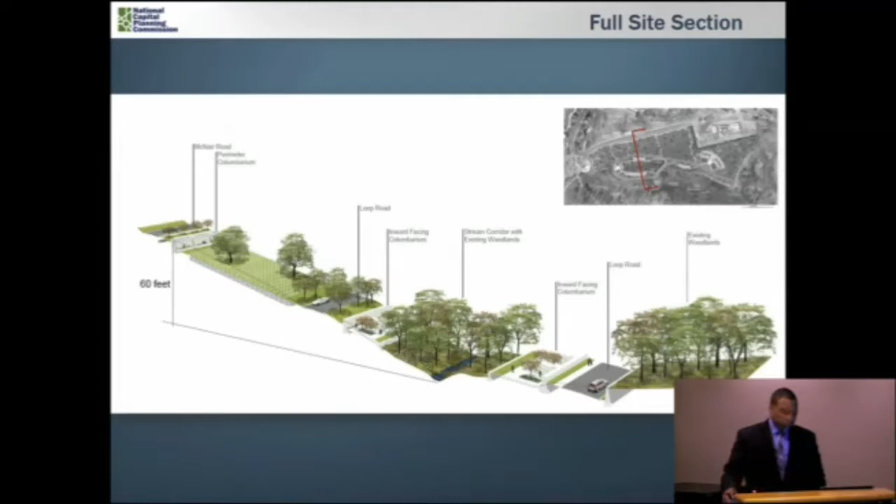Perhaps another way to explain this is for optimal land use planning, based on the requirements for the various in-ground versus crematory and so forth, the columbarium, this is the optimal placement of the crypt space, the burial space, the cremation space, the niche walls, and so forth. And therefore what follows is the placement of the road, a sequential, linear process, if you will. Is that an accurate description?

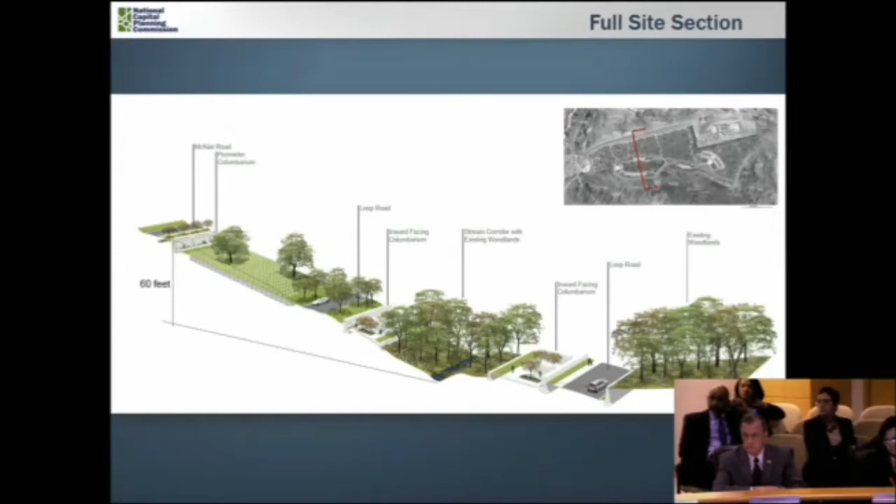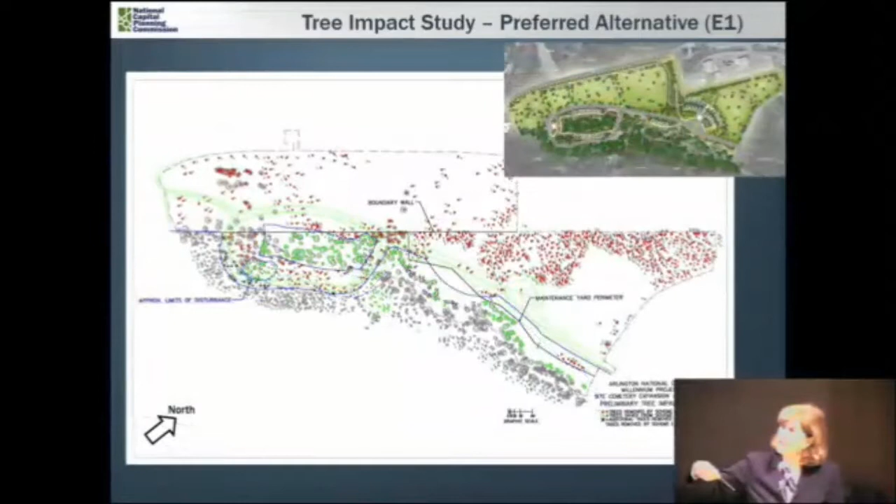Could I just say one thing too, though? We had asked and just got information on the alternative F that you don't show here, that would eliminate that loop road going across the stream. That's really the issue, that's the concern I think. So it would not cross the stream, and we just got information a couple days ago that the actual number of burial sites would exceed the existing design. And I guess what we were told is that they just want a lot of parking area in the middle of the cemetery. But if you look at other parts of the cemetery, there are other areas that don't have a huge amount of parking.

And this alternative avoids that. So we were concerned that this wasn't given adequate consideration. And also some of the tree numbers we think are off on this analysis as well. And also this analysis said something about it violating the Chesapeake Bay ordinances. Well, actually the other one is much more likely to, because it actually crosses the stream valley and would be constructed near an existing seep, whereas this would avoid that. So that was one of the issues we had, is why wasn't this given greater consideration?

Yeah, I mean, this also has impacts to the 145-year-old tree area, where there are columbaria, as you see in this image up here. There are columbaria that would be associated with this. This is where the stream is, so there would be some impact, I'm not sure what would happen here, but it would likely be that there would have to be either a turning of where the stream is, or it would have to culvert under a portion of this and then come out at the end. So there are impacts with, I guess, each of the alternatives that they looked at had impacts.

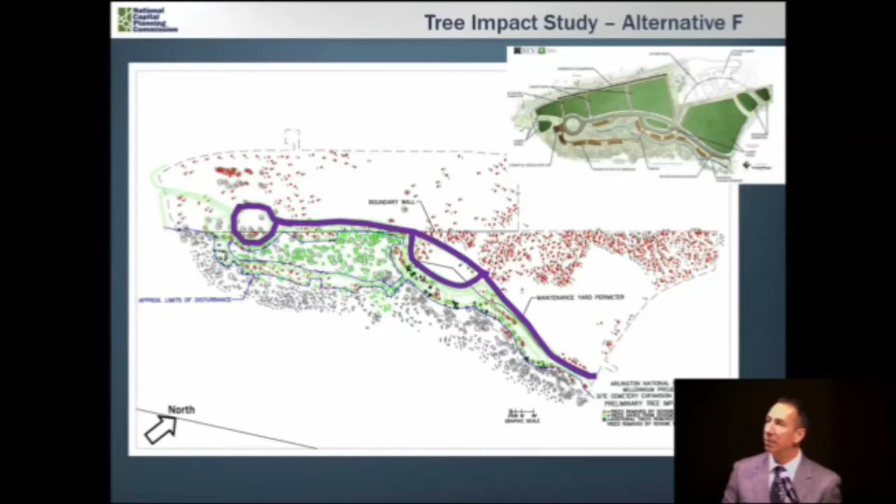I also wanted to speak briefly. It was mentioned that there are impacts to the perennial stream, the intermittent stream, and the seep. In the current design concept, we are actually including bottomless arched bridges in multiple locations, in each location where a bridge was shown, to minimize those impacts to the environment and those water features. Thank you.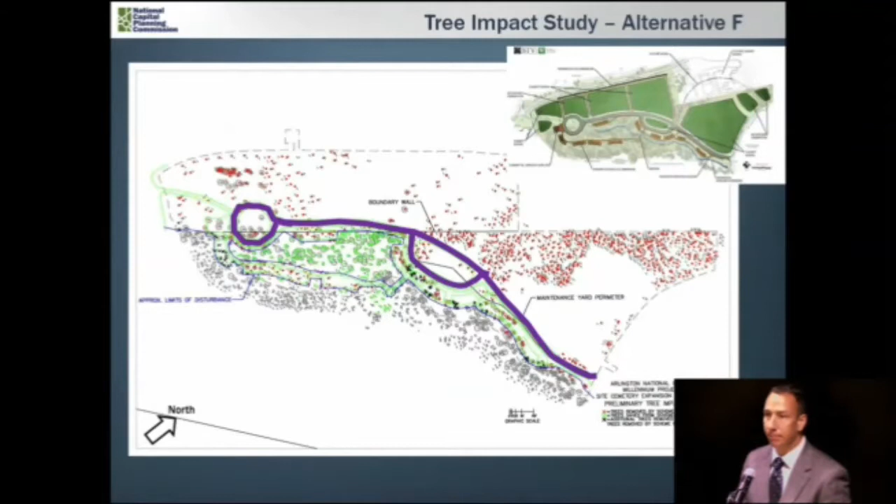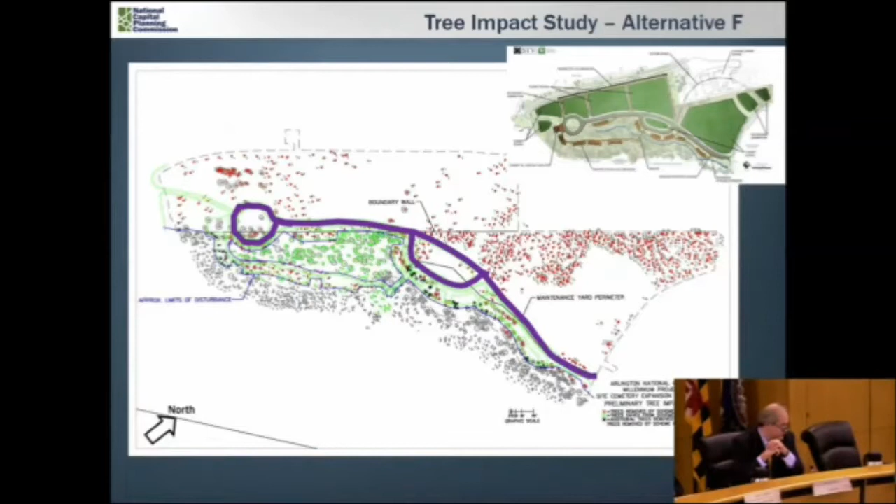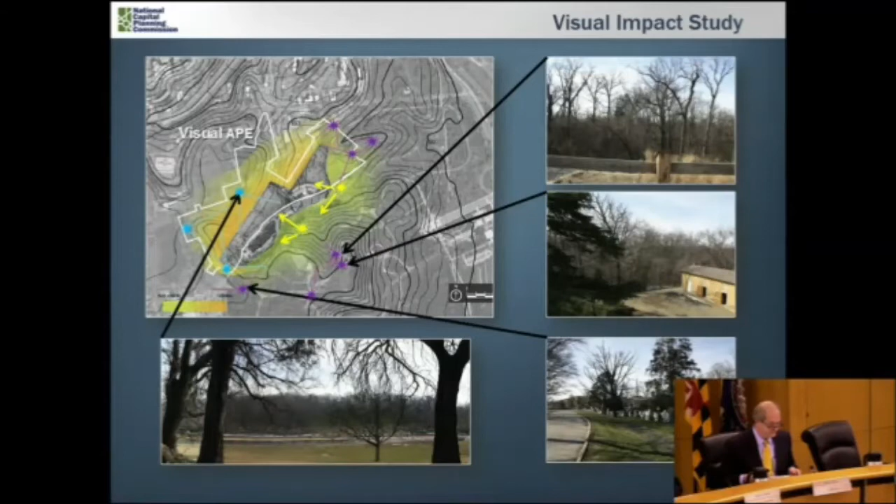I think it was mentioned how supportive the Commission of Fine Arts has been. I think in a couple, three areas, it's significant we need to reinforce. I think they're pleased with the environmental impacts, the very modest impacts, the protection to the maximum extent of the trees, and the stream restoration. I think one of the reports, not a CFA report, but a negative report, talks about destruction of a stream, but I don't think that's at all accurate. I think all the streams, even the intermittent streams, are being preserved and restored.

Did I understand also that perhaps columbarium B is coming out, so there's even less impact? The site might be reserved for a future columbarium, but the most current plan removes columbarium B, the standalone one, from the design. And the benefit of that would be even less net loss of trees, at least initially? What it will be is not only a net loss reduction of trees, but we will also be able to add more trees in that area, which is currently where we have the warehouse. We would love to put trees back in there rather than have those concrete structures we currently have.

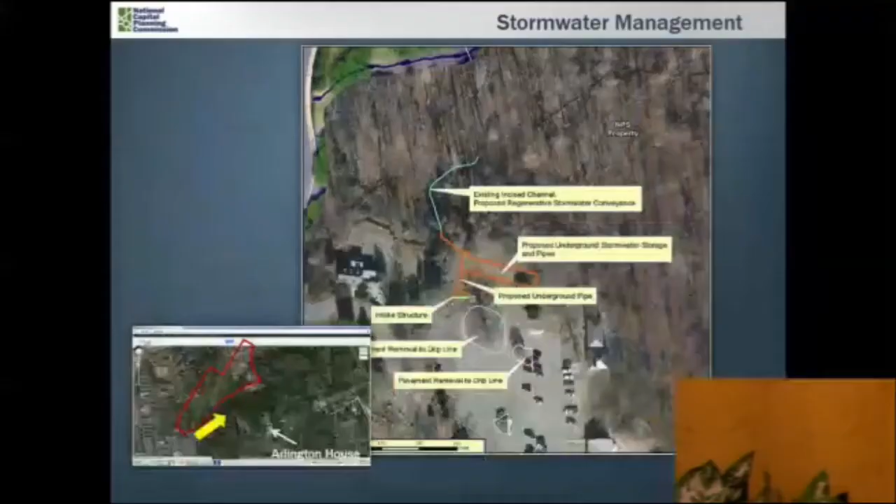So when's the construction schedule? When are you supposed to get notice to proceed and go? In real life, not in fantasy land. We're targeting an aggressive contract award at the end of September. Contract award, but notice to proceed would be? Weeks after. Wow.

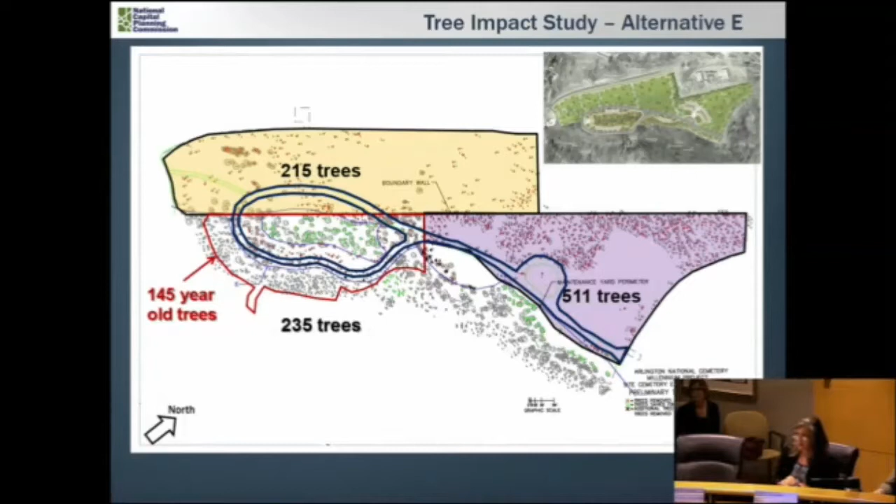So if you're close to 100%, you still have time to make changes if they need to be. Yes, ma'am, because you're not swinging a hammer until the fall or digging a hole. So, okay, never mind.

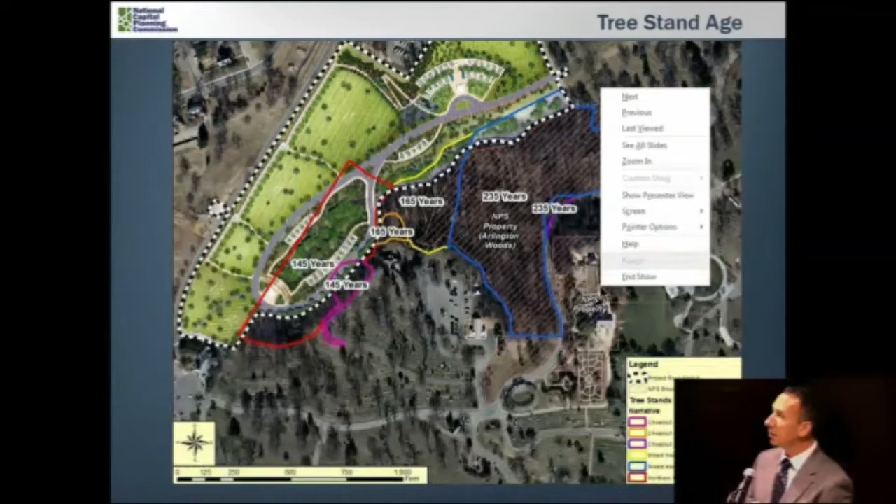Based on comments received, the portion of the loop road that does pass - if I could go to the previous image, the overall project graphic - what I'm looking for is just the overall project graphic, the current rendering. Yes, any one of those. The portion on the very bottom of the image, the loop road on the very bottom, that portion of road has been reduced from 30 feet down to 22 feet.

And that is to allow parking on one side of the road for ceremonies while allowing a separate lane of traffic to pass by. The remaining portions of the road are all 30 feet, and that's to allow parking on both sides of the road for ceremonies up in the interment areas, as well as a possible simultaneous ceremony down in the columbaria area, and allow one lane of traffic to pass through, including emergency vehicles, an ambulance, fire truck.

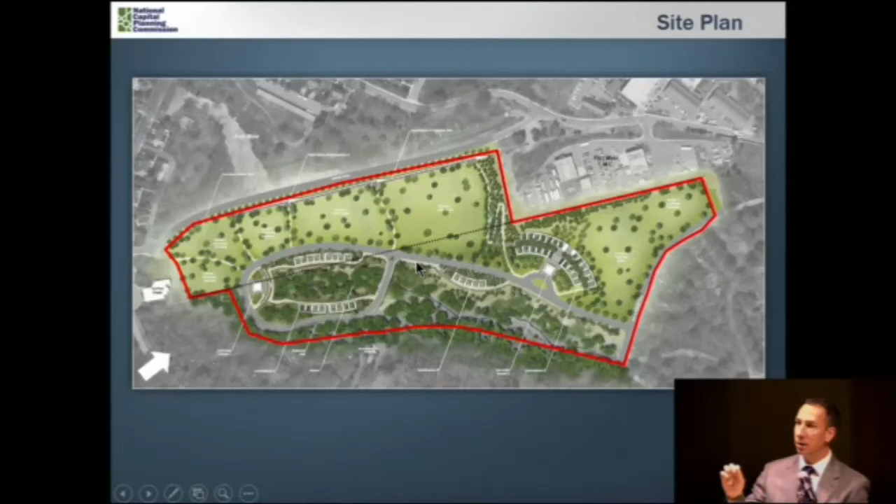A couple of the design changes, if you can go to the image that shows the purple bridges. Based on the comments received already in the NEPA process, the very bottom loop road, the southern bridge, that portion of the road has been realigned. It bumps out a little bit. It looks odd when you look at it from this perspective, but previously it was more of a consistent arc. We bumped that road out a little bit to miss and avoid a large stand of very valuable red oaks in that area.

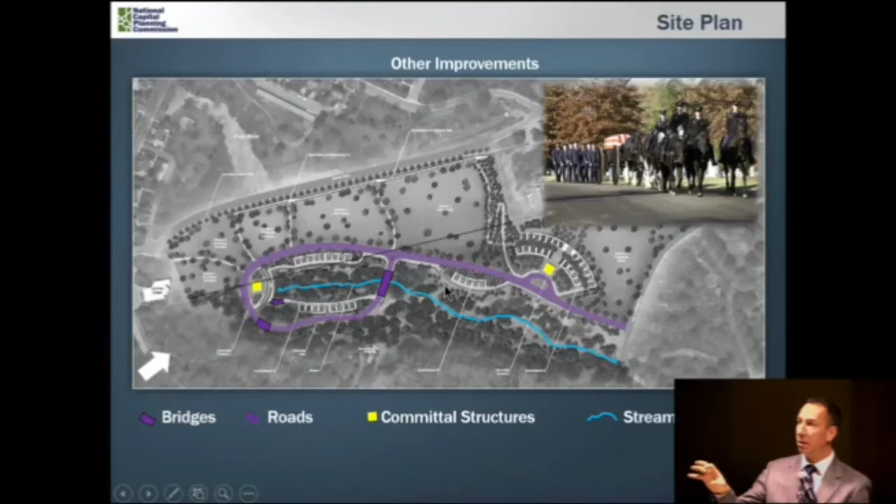So we're saving those trees. The large arch bridge that goes over the perennial stream, we realigned that road again to save a large, dense stand of valuable trees. And the other smaller arched bridge, that is actually on the pedestrian walkway. As all of those are arch structures, it allows wildlife to naturally traverse underneath them compared to a box culvert or more of a rigid structure. Thank you.

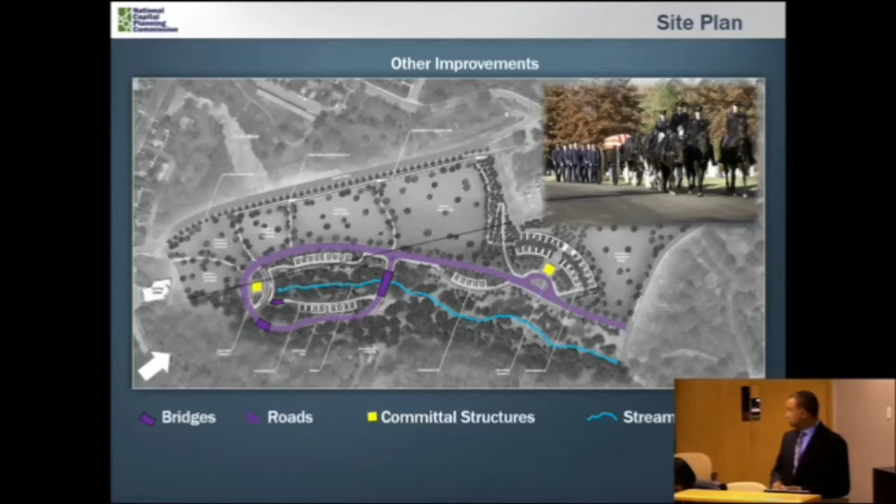Can I make one more comment? I would say that by proceeding to 100%, you may have taken us for granted a little bit. But any further discussion, Mr. Miller?

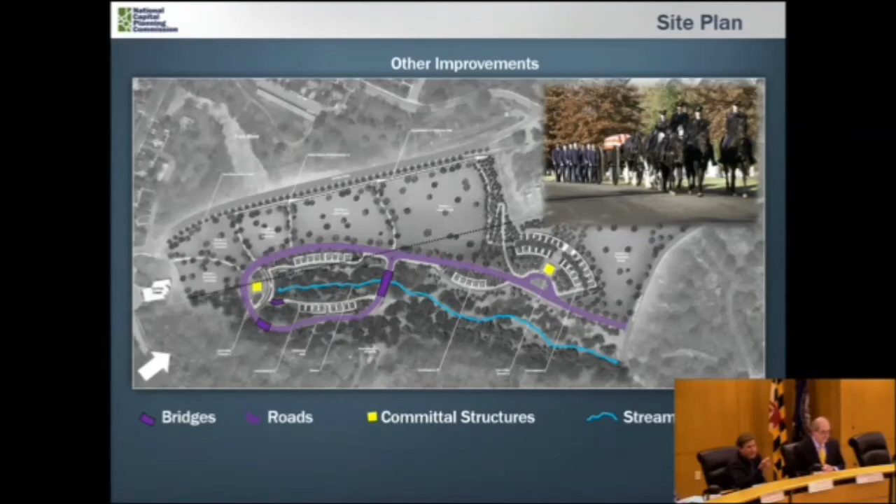Thank you, Mr. Chairman. I just had a question for Mr. Hart and maybe one for Mrs. Condon. The maintenance facility, is that staying or being relocated somewhere else? They're looking at relocating it, and it's probably best for them to. So I would want to know where is that going to go, and if you could speak briefly as to what your longer-term solutions are beyond the 7 to 12 years that this will buy you.

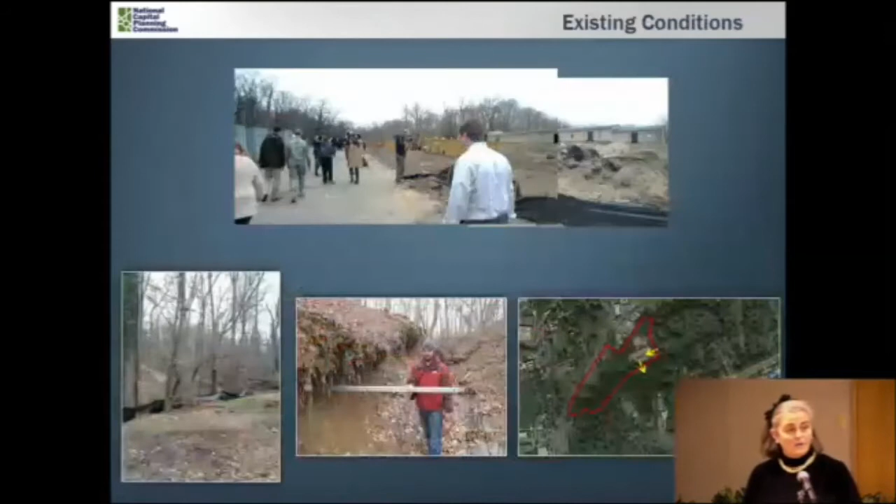The maintenance facility that is there, it's really a contractor maintenance yard. So what we're doing is moving that to a current area in the cemetery where we have a contractor for the Potomac Interceptor project that is going to be finishing the project, so we will move it there. We're also lessening the footprint of what we provide for the maintenance yard, because in the section they're in now, you give them space, they expand to the space. So that will be located to another section of the cemetery where we currently have a spoils area for this one.

And briefly, what are your longer-term capacity expansion plans, since this project will only get you 7 to 12 years? Right, and as you know, we also have the Navy Annex property, which is where the Air Force Memorial is. Those buildings are currently being taken down, and we were just appropriated the dollars in our FY13 to start the planning and design for the Navy Annex project. So that will be our next expansion project.

That will allow us to have our first interment space well into the 2050s. For those that aren't cemeterians, I wasn't one until June 10th of 2010 - what first interment space means is it's the first burial of a veteran or their loved one. There is always a subsequent burial of a spouse, and that will extend well beyond 2050, but it will extend our first burial space to 2050 with the Navy Annex project.

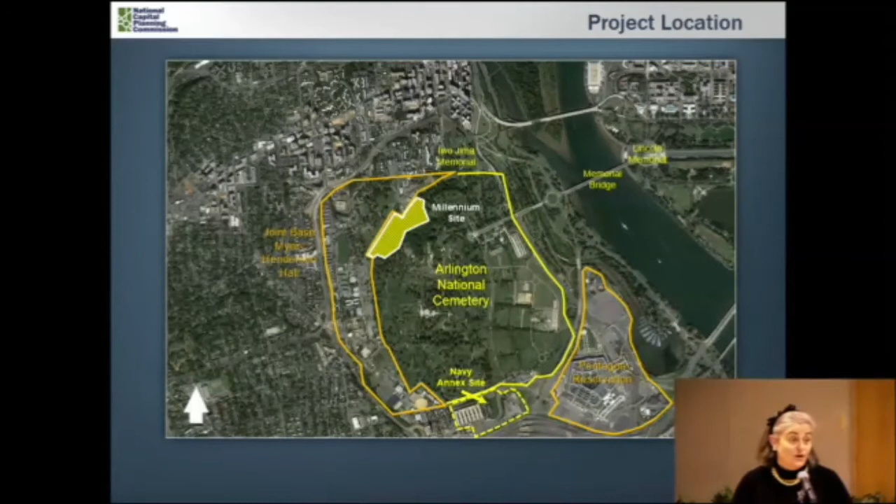Thank you. Okay. If I could add, that project is on track, actually even ahead of schedule, and that will turn over more than 40 acres. So tremendous capacity with that adjacent site.

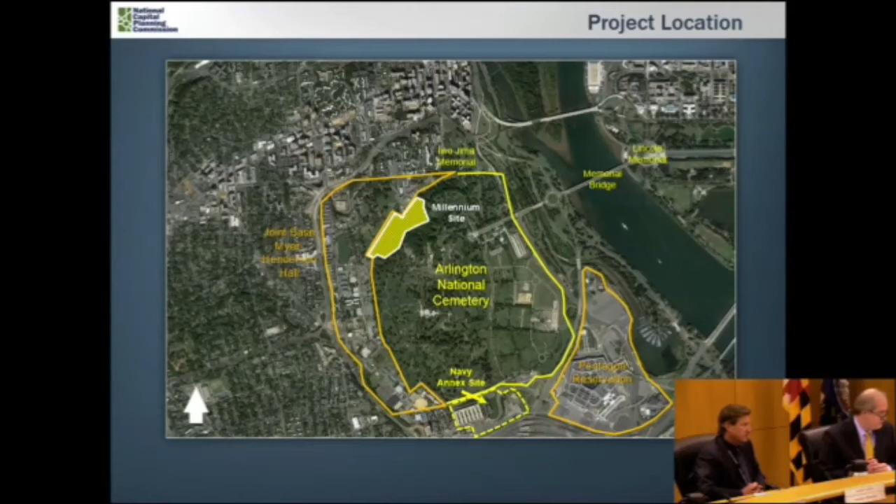Good, very good joint planning with Arlington County and some of the other inhabitants. Proper optimal placement of the facilities, for example, south of Columbia Pike, in an effort to minimize caissons passing back and forth from the two portions of the site.

Lots of options on the table. Arlington County, for example, would like to have a Freedmen's Heritage Museum Center. There's opportunities to do some joint planning for visitor centers for the very close by Pentagon Memorial and the Air Force Memorial and the Arlington cemetery. So lots of opportunities to jointly plan those areas.

So will we see that before the drawings are nearly 100% complete? We would hate to fail to meet your expectations to bring you anything less than 100% designed. Yeah, what's normal for concept? 30%, something like that? 35, 65.

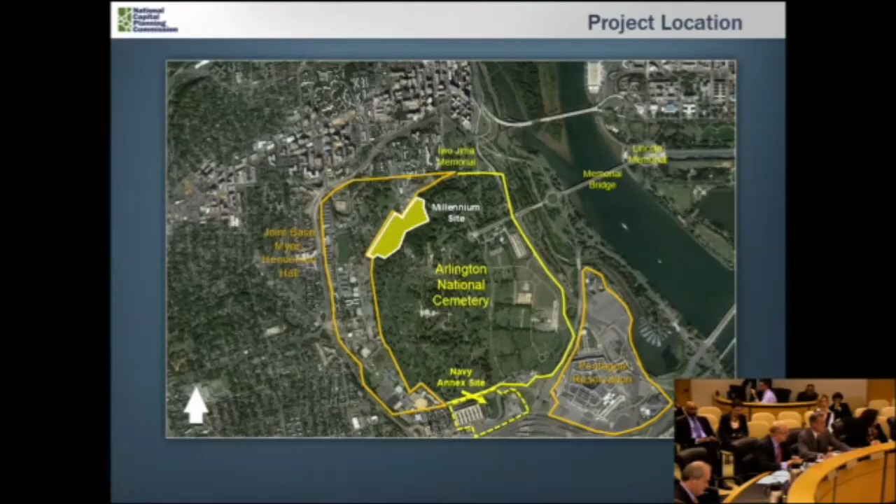So, Mr. Chairman, I would move that we modify that one bullet point as Mr. Goni had recapped it for us. It's something along the lines of encourage a thorough explanation of decreasing the width of the road bed in the area of the Arlington House Woods and other means for further reducing tree loss.

In modest opposition to that, the Army has shared with me that they are willing, more than willing, and have clearly demonstrated their willingness to fulfill all 4 of these expectations for subsequent submissions, as currently stated.

So the amendment has been moved, and I presume there's a second? Second. It's been moved and seconded, so this vote's on the amendment only. All in favor of the amendment, say aye. Aye. Opposed, no? No. 1 no.

Now before us is the amended EDR. Any further discussion? Hearing none. All in favor of the amended EDR, say aye. Aye. Opposed, no? No, it wasn't moved? Oh. Is there a motion on the EDR as amended? It's been moved and seconded. Forgive me. All in favor of the amended EDR, say aye. Aye. Opposed, no. It's approved.